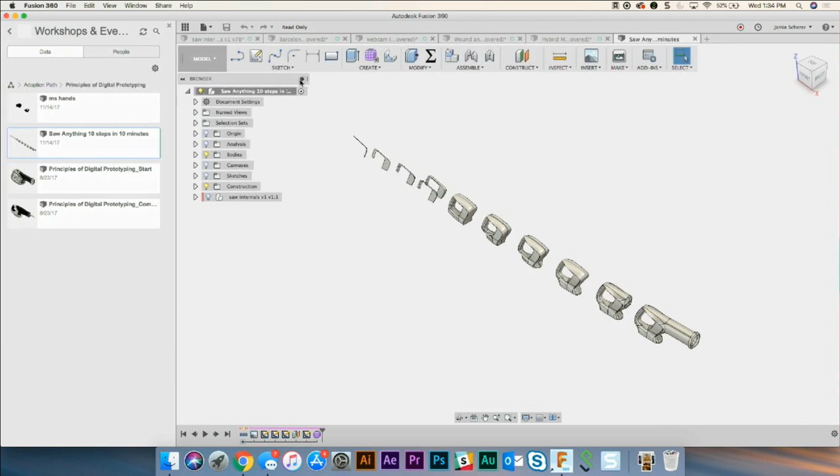This one I added literally 2 minutes before we started because I just learned it. So if this helps you, it helped me, thanks to these guys. They just showed me. So I am one person that is really bad. I have a lot of bad habits.

One of them is jumping in through the data panel, getting deep into several folders, and hitting the arrow in the top right corner, which takes you to the root of all of your projects, right? If you use Fusion, and you say you haven't done this once before on accident, you're lying. So if you hit that arrow, it takes you all the way back to the top, right? The root of your project, not the previous folder.

But when you do that, so I'll do it again. If you mistakenly, I want to go up a folder, right? The previous folder that I just clicked through, and I accidentally leave the data panel, go to the top of the data panel, you can hit this back button, which I refer to now as Back to the Future, and it'll take you back to the recent project that you're in and the folder that you were in.

Bryce and Patrick just saved my life a couple minutes beforehand, so I figured I would add it.

Couple more quick ones. So selecting through, and selecting parent, face, body, entities, etc. So we'll just do this one really quickly. So if you're in Fusion, I know this is something that new users struggle with all the time. So let's say I want to select, and this might be when I'm creating a joint, or it could be just for any reason. I want to make a selection of, let's say, the underside of this little component, right?

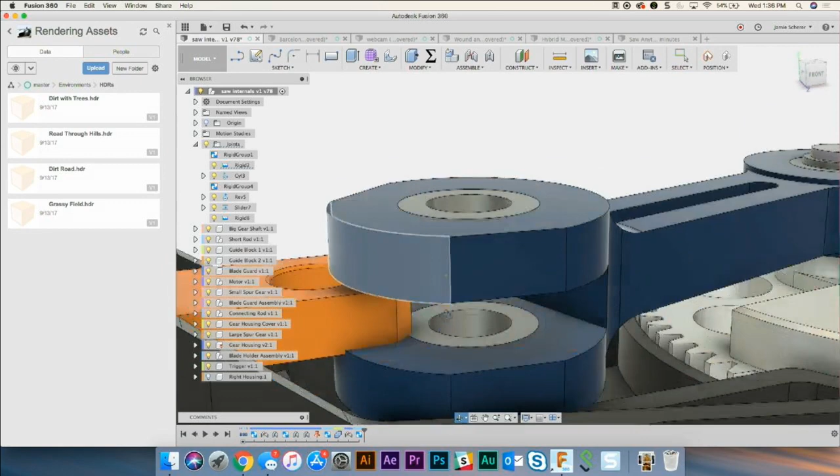And I can rotate around all day long and grab these, but really all you have to do is click and hold. So if you left mouse and hold, it gives you a selection or select through dialog. And then you can click through all of the faces that are within that scope that you clicked and grab the appropriate face that you were looking for.

The other thing that you can do is, same thing, left click and hold, you can go to the parents dialog, which will let you select, did you want to pick a face? Did you want to select the base feature that it was created from? Do you want to grab the whole body, the component, or the entire design that's within, right? So just an easy way to jump between different selection filters inside of Fusion.

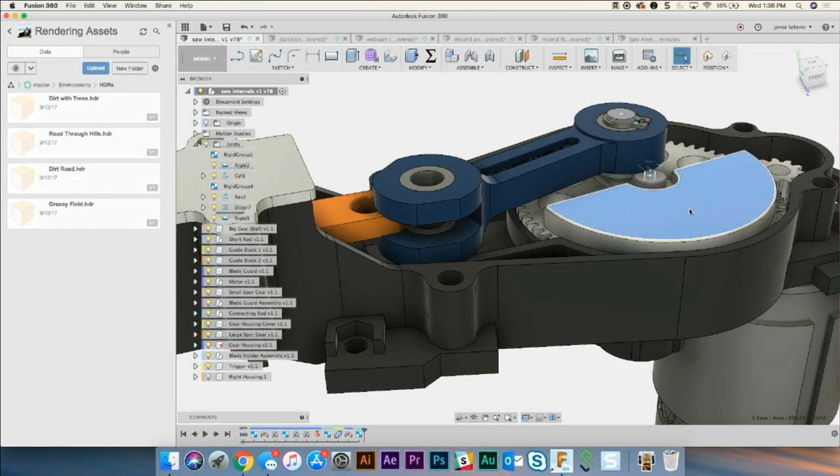And one more to build on that. This is a really quick one. We'll jump right back into the same model. So if I want to decide between selecting the body or a component, if you single click on an entity in Fusion 360, you'll see, if you look in the tree, we'll make some space here, it is body number 1, right, which is the body that I clicked on.

But if you double click, it actually grabs the component, right? So we'll do that again so I don't mix words. So single click grabs the body, double click grabs the component, right? So you'll see it grabbed the large spur gear as opposed to body 1, which is that component, right? So just a simple single click, double click, it'll hopefully save you some time from digging through your browser, finding the bodies or components that you're looking for.

And of course, the easy way to do that is when you're clicking on it, I might hide it. Oops, let me go back to that. Now, one thing that I know new users, myself as well, struggle with is you'll notice with this large spur gear that I had open, it's visible, the component, but the body is turned off, right? This can get confusing, right?

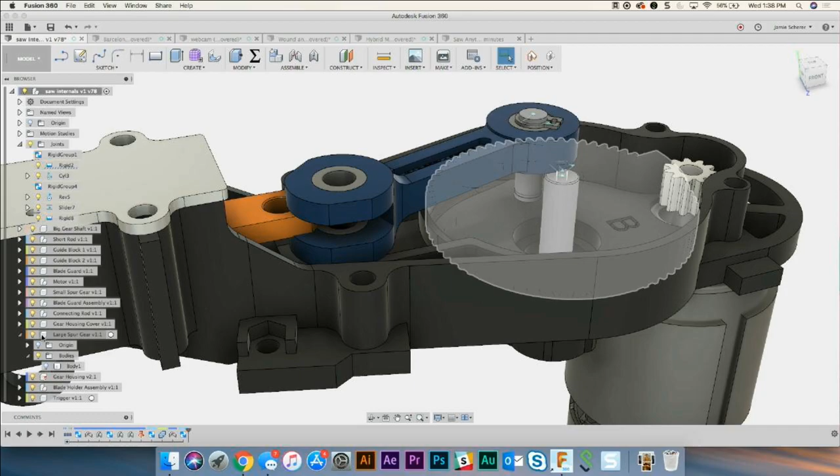You can start to lose track of even doing something like show all components. It won't turn that body back on, right? Because it's a body inside of a component. The component is turned on. So when that happens, we have a solution for you. There's an app for that.

There's an app for that. Patrick finds all the things that he doesn't like and fixes them in Fusion in a couple of minutes with API. So Patrick, more than a couple minutes, but that's okay.

All right, so I'm going to show the first. All of my stuff I'm going to show today are all just various little utilities that I've written over the last couple of years, and they're all on my GitHub site, and we'll have the link up in a second.

This one, I call it Show Hidden and Display Utilities, I think is the name of it, and it's just a bunch of quick little things here that go into the drop-down. So you can say, for example, show all bodies. And it will just show every body, no matter if it's nested deep down into the component structure, so you don't have to find it.

And then the one that I particularly like, I call show hidden bodies. So what this is: you have some model open, it has hidden bodies that could be deep within the structure, and then you say show hidden bodies, and it inverts the display. So now you're just seeing the bodies that were hidden,

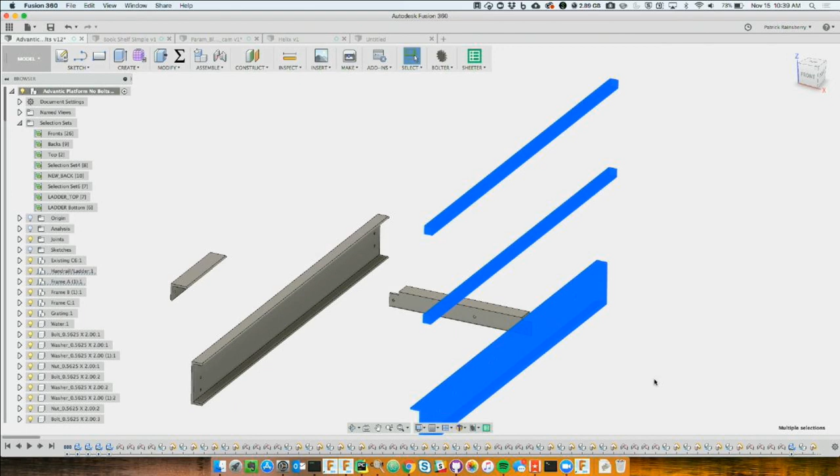and so now you can grab these, hide them, and then say show hidden bodies again, and now you're back in the state where the things you wanted are shown. It also has the same capability for components and construction planes, where it's sometimes very difficult to figure out where that one construction plane you wanted was deep in a structure. And also to just hide them all, which is nice too.

Hoot and holler if you like it.

Silent. Please. Yeah. When you're doing the API stuff, could you write keyboard shortcuts? It's not exposed. No, I know. Repeat the question. Oh, sorry. The question was, could I have written it such that it was hooked up to keyboard shortcuts? And the answer is no. Why not? It's just not exposed. There's no event listener for keys. We'll talk about it later. But jump on the idea station and request exposing key events in the API.

If you don't have those three little icons in the lower right, is there... Oh, this. This is all API. So this is an add-in, it's a plugin. Sorry, I should have been more clear about that. We'll give you the links to download these little utilities. These are little utility plugins that you install through the add-ins thing, and then you'll see it here in this list. It's called display utilities or something.

Holy moly, you have a lot. Yeah, some of them are half-baked. You can get a preview of next year's tips and tricks session by looking at that list. I've never seen that many.

All right, so let's switch it up. Those were some general tips. Now we're going to get into the building blocks. Every sketch, unless you're just T-splining or using primitives everywhere, which is too hard. So let me jump into Fusion. I'm going to start slow and work my way through it. I'm just going to start with a line tool, and the first one's pretty straightforward. I'm going to continue, and you'll see that it's going to keep adding these lines.

It kind of gets hectic sometimes, and if you click and hold while coming out of this, you get a tangent arc. So with the click and hold, you don't have to go back and activate the tangent arc command. And then if you come out with a line again, you'll see this tiny little blue symbol, a circle with a line in it, I believe. That's going to create another tangent constraint if you're trying to chain all these together.

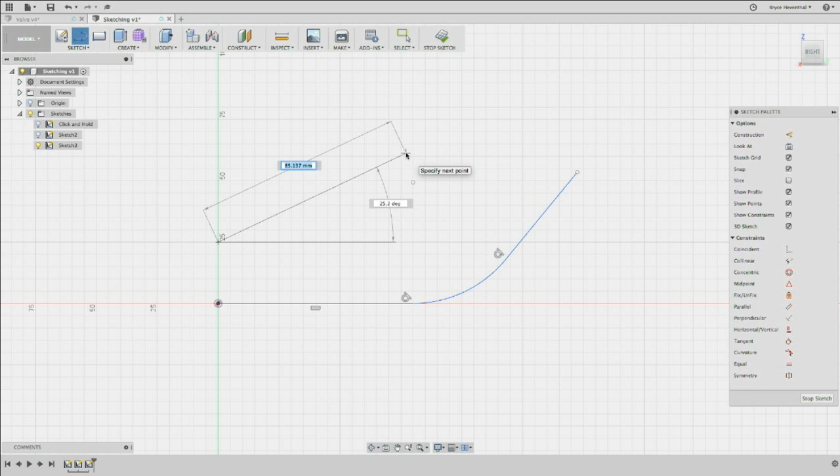And then this little bane of my existence, this green checkbox. I always click it accidentally. It actually ends the line. I use a couple different tricks, though. What I want to do in this case is draw a line and end it, but I don't want to continue, and I still want to stay in the line command. So I'm going to double click, and you'll see I'm still in the line command, but I'm not chaining them one after another.

Usually you're doing the game where you click, hit escape, go back to the line command. You always could right click and drag up, but I love that double click. We call it create and continue. So double click, and you can keep going. So there's a big one there. Let me stop this sketch and hide it, and we'll turn on another sketch.

This one, I always forget that it's a part of the sketch tools, but let's jump in here. I'm going to activate the line command again. Again, I use my S key, probably 100% of the time, as Jamie was saying. If I touch these top bars, it's because I'm still searching for everything too, so I don't ever come up here. First, I want to make a line perpendicular to this box. Usually you'd draw a line and get perpendicular. If it's off the XY, or in this case a ZY, it wouldn't get perpendicular.

But if you click and hold, you'll see it actually is going to be perpendicular to that line. And it works in a couple different cases. So if I click and hold here, you'll see that same behavior. And this is where it gets a little bit tricky.

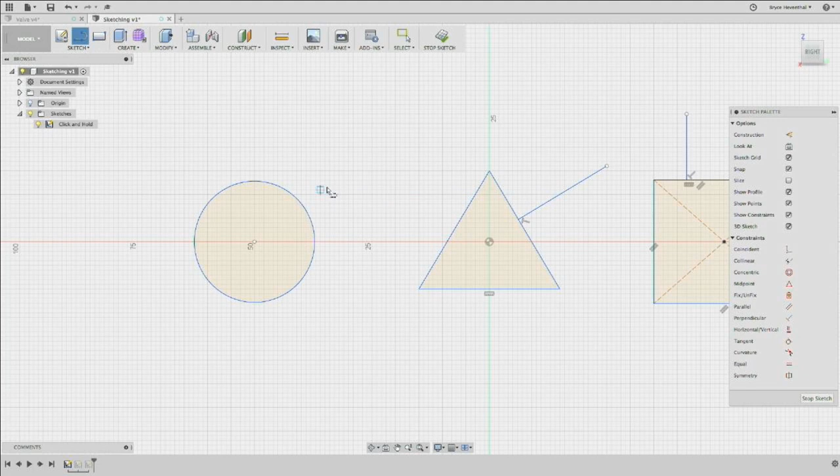So if you click and hold in a circle, what do you think is going to happen? Anybody got a guess? Sort of right. It's tangent when you're not at the 0, 90, 180. But if you go to the 0, 90, 180 or 270, it comes out perpendicular to that circle. So the two behaviors are kind of hard to notice. If I start at one of the quadrants, it'll come out perpendicular. Anywhere else, it comes out tangent.

Just quick ways to keep doing lines and save you from having to do extra relationships. Stop that sketch and jump to another one. That's the double middle mouse click that Jamie showed earlier.

Ooh, scared the crap out of me. You were supposed to be talking to this. I am. Oh, sorry.

Continue. So the next one, what I want to do is make constraints here. They have this huge list of constraints over here. I have a tough time reading them, and especially if you notice, they actually filter slightly gray. I can't see it very well when you select things.

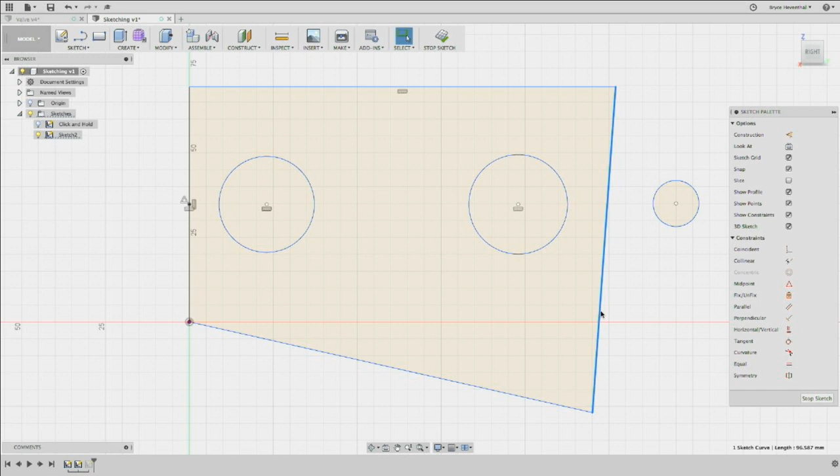My favorite thing when I'm making constraints, I basically always do this: I select my entities, right-click, and you get a filtered list right in the right-click menu. I do that all the time. Uh-oh, that is not the constraint I wanted. But we have an undo, if you guys haven't found that yet, and I'm going to talk about that a little bit later. Then we'll just make that one vertical.

Boom. So this next one kind of drove me nuts for years. What I really want to do is draw this circle over this line. I want it to line up right in the middle. We would call this a midpoint constraint, but there's no point here, so I'd have to create an extra line or do some point.

Not quite. What's going to happen is you have to start by turning on the constraint. Fusion's one of the only tools I know that, once you activate the constraint, it's kind of locked on. So you can quickly make all these horizontal because it's stuck. I click one, click the next, click one, click the next, and make a bunch of horizontal constraints. It's great for horizontal, equal. If you want to make a bunch of things parallel or concentric, it's a great method for that.

But now I want this circle right here to line up right in the middle. So you have to activate the constraint first again, click your point, and hover around for a while trying to find that midpoint. It's not happening. Magic hotkey: hold shift, and you'll get that little triangle come up, and that's the midpoint. Now this is locked in there, so if I make this any bigger, you'll see it always follows. Shift is that magic key.

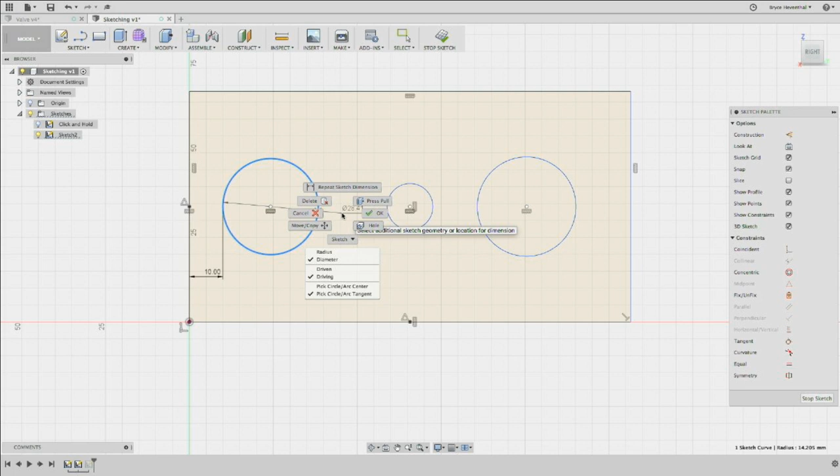Just remember, you have to right-click first, click it, then right-click again. Oh, it locks on, sorry. Whoa, turned on something. So right-click first, click that guy, then come over here and select this guy, and now we have tangent from circle to circle. You could go from max condition, min condition, min to max, whatever, you could get fancy with it.

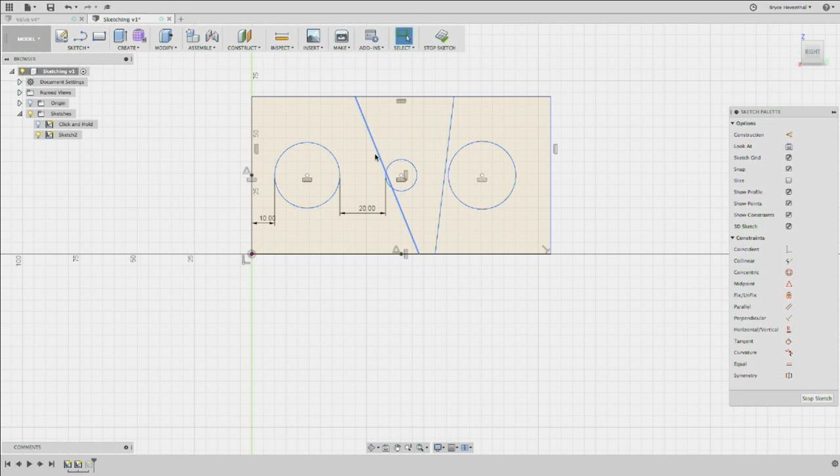All right, this next one is one of my favorites actually. So I like to create a lot of construction geometry. It drives me a little bit nuts when I get too many regions, because when you start extruding and stuff, you get all these different profiles that you want to do. I use construction geometries for symmetry, weird things, just to reference.

So usually I would create the square and then go back, and if you didn't know, the hotkey's X to make a construction, so I'd go back and hit X, or turn it on and off over here. But what I really want to do is create that square first with construction. So you would turn on the construction tool, and then use whatever sketch tool you want. We call it forward create construction.

Now I could use the line tool if I wanted to. I'm still in this construction mode. Remember you have to turn it off. So you could see that now I could make a bunch of construction lines. Just remember to use that to turn it on and off.

The construction line is, in the sketch palette, there's a construction box. Once you turn it on, all the sketch tools you use will now be construction geometry. You could do it before or do it after. We give you the flexibility to go either way.

All right, so this one's just a quick one that actually works throughout most workspaces, and I use it for simulation - some of my favorite selection tools. If you didn't know, right here we have a big select button with a whole slew of selection tools. Take a look at them. My favorites are invert selection and select by size.

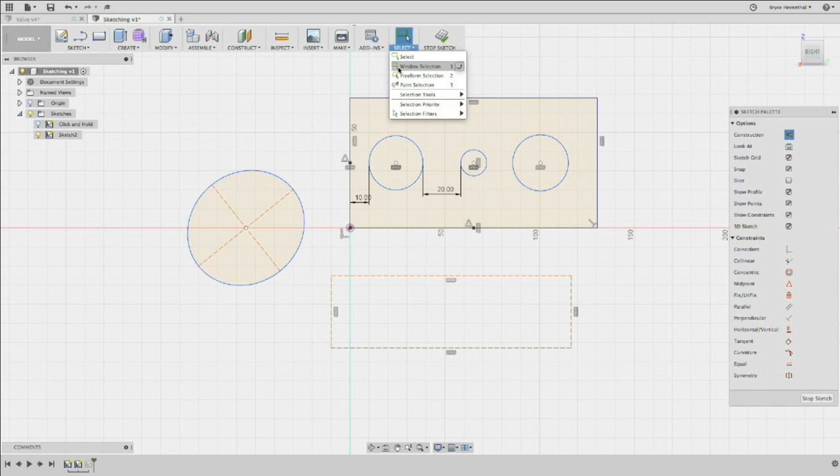But just to select sketches, by default you're on this window select, where left to right it selects inside that box, and right to left it's whatever's touching that box. So left to right, that entity has to be entirely in that box, and right to left it just has to be touching the box. Same thing goes for a couple other ones we're going to see here in a second.

So if you go down to select, it's also the 2 key, the freeform, and you can make whatever shape you want. I like to use this for redline markup in Sketch if someone's watching. But same exact type of thing - if you go left to right, it has to be inside that box, or right to left. I always get this one backwards.

Counterclockwise? No, that's weird, can't even get it to work. There it is - so it is right to left. And then it just needs to be touching that box. You see it got both of them.

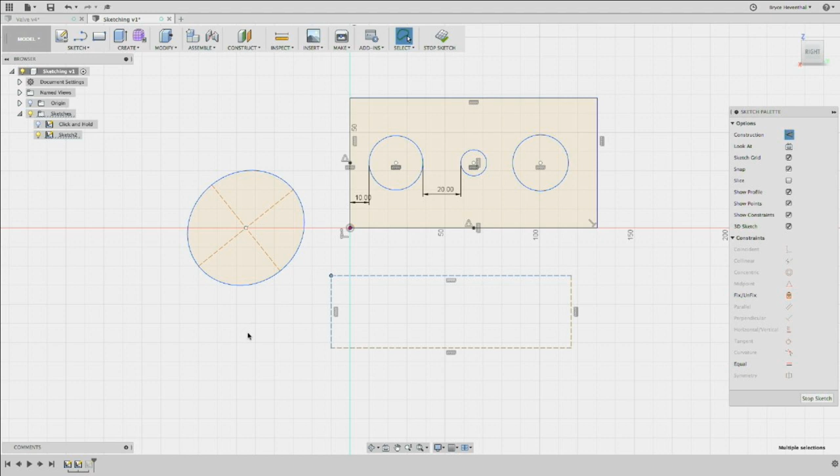All right, let's switch real quick - last couple ones for Sketch. This one is one of my favorite ones. Let's jump in here. I want to create a sketch for some holes here. So what happens is I want to bring my circle in.

Especially for new users, you get all these blue lines - you see these blue lines I'm picking up in the background - those are just things way out in, I don't even know, no man's land. So if you actually just start clicking, you'll see that I just made two coincident, fully defined that accidentally to something random. So the magic hotkey - if you hold Command on Mac or Control in Windows, we need a simpler way to say that eventually - it turns off those auto projections. So you can just click and not worry about picking them up or having to go back and delete them later.

Let me just create a circular pattern real quick. Object, let's get the point. Say I want 4 of these guys - just circular pattern of circles. One thing - design change came, now they want 6 holes. Usually I would probably go back and delete those.

For sketching, if you do any patterning, there's actually a feature here, or a constraint here essentially, that you can edit, and you could jump right back in and change that to 6 if you needed to. So there's that little constraint right there. It gets a little bit hectic, especially when you have a ton of patterns to find which one's which, but you could edit those patterns.

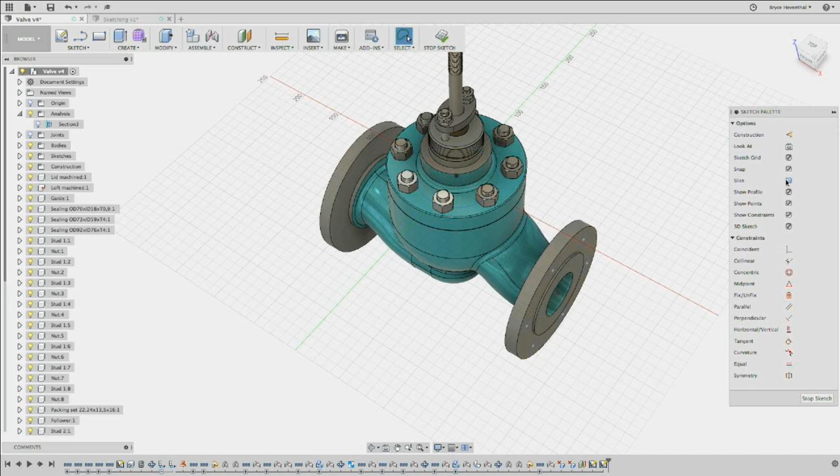Now I'm designing inside this part, and I always have issues clicking on things, especially when you go to extrude something - you select this top face, and I really want that profile there. There's actually a button called Slice, and what it does is like a section view at that time, and it brings you down here so I could keep on sketching.

Maybe I wanted to add some circles around that one, and now I could use that. Slice you can turn on and off globally from here, as well as select the sketch and use the same slice sketch. So if you have tons of sketches in the middle somewhere, you could select different sketches, slice them, and kind of interrogate the model that way. But I'm a big fan of using slice out of the sketch palette.

With that, we're going to switch it over to some modeling.

All right. Sorry, if you guys have questions, shout them out. If it's a really long one, we'll be around all week. And when you see something awesome, clap - high five each other, come up here and high five me, Jamie, if you really want. It really makes this better for me, not for your ego, but for me - it's really better for us if you clap a lot. Yeah, exactly.

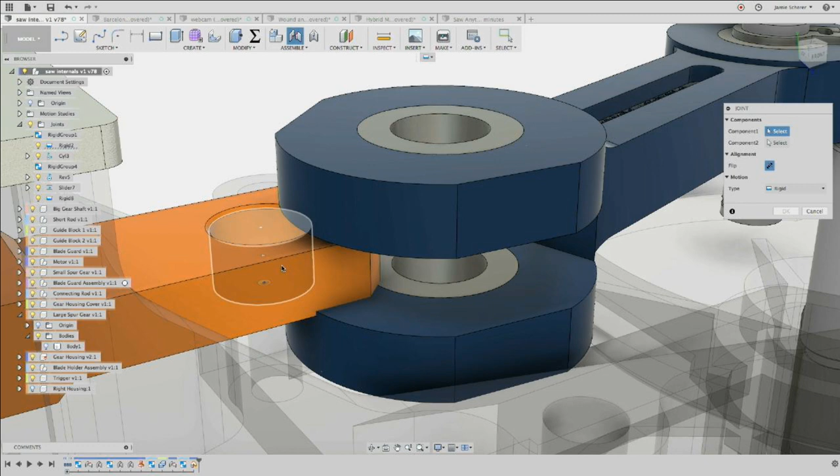In this case, I'll create one between this selection, and now I want to grab, again, empty space - I want to join the center of the blade rod connector to the center of this crank arm, and I don't really have a good way to grab that. So the way you do it in Fusion: simple right click, say between two faces. This will give you the ability to say the first face is the bottom, second face is the top, and then you just have to locate the joint origin. So you'll see when I select maybe the center of those bushings, it'll grab that empty space or that middle and then bring them together for me.

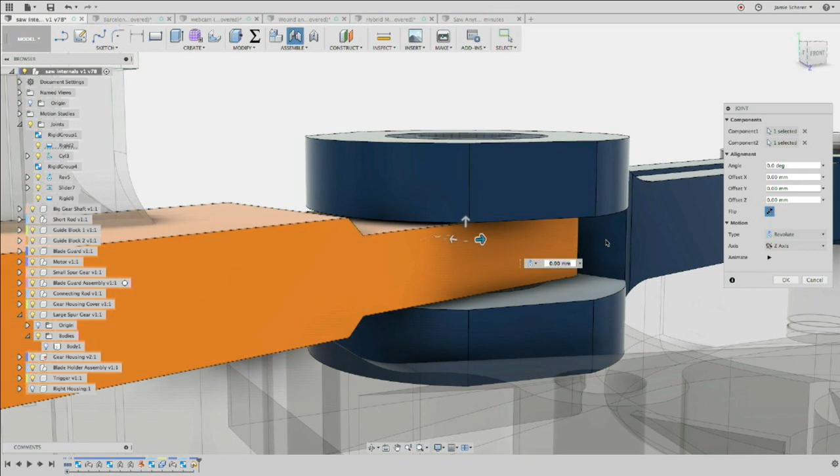Okay, thank you, John. That's it - it's a good one, a really helpful one, and ultimately helps you build better assemblies really quickly by using that between-two-faces option, actually creating a joint origin between two faces where you can manipulate the joint itself.

Is it the same functionality, just faster? It is. The difference - what John is referring to is you can create a joint origin. Joint origin is a good instance if you wanted to create a joint between two components. Between-two-faces only works within the same component. If you wanted to grab space between two separate components, a joint origin would be a good way to do that. But in that case, if they're not the same component, then you would want to create a joint origin.

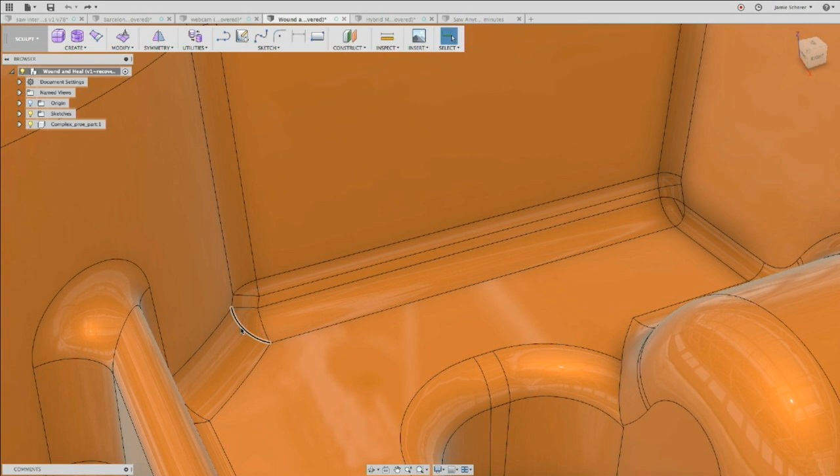All right, next. So the other one that I want to show really quickly, and hopefully this will be helpful for some of you. If you're frequently importing geometry, it might be geometry from any CAD system out there. If you're machining parts or bringing in someone else's geometry, you might need to make changes, right? And hopefully everyone's aware by now, Fusion is incredibly powerful at direct modeling, but sometimes it just can't solve the geometry, right? So you'll see, like in this instance over here, I've got some weird fillets.

Maybe I don't want them. I want to change the fillet. I want it to be one continuous fillet as opposed to these kind of two. And I have some bad faces here. So the simple thing to do in Fusion would be to delete them, right? Grab these faces, hit delete. Most of the time, Fusion will say, no problem, I'll remove it.

But in this case, it gave me a warning, right? It said that it couldn't solve that geometry. And it might be for any number of reasons. It could be the geometry. Probably in this case, it can't quite solve what's going on in the corner with these fillets. Awesome method that Brad Tallis on our team has been showing everyone. He calls it the wound and heal method, right?

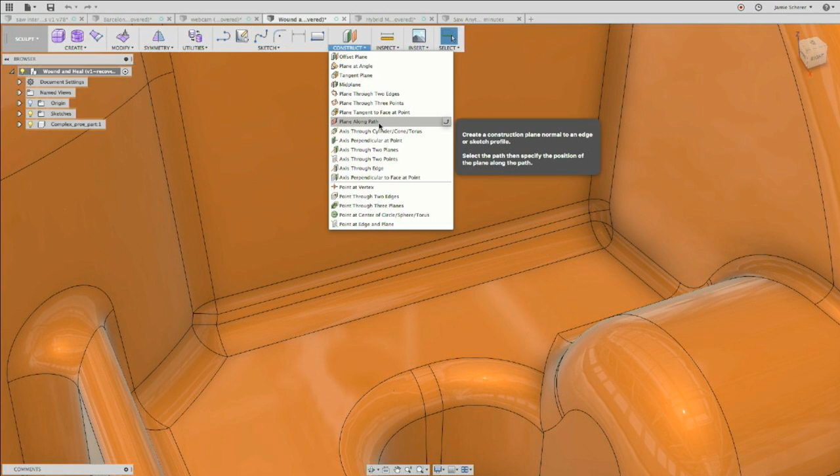So what I'm going to do is wound the geometry, right? I'm going to create a plane along a path, put it all the way at the end. And then I'm just going to use something simple like a primitive. So we'll just use a sphere on that plane, located anywhere. Basically, I'm just kind of taking an ice cream scooper and removing out that geometry, right? It's bad geometry. I don't want it. We're going to cut that out. I'll do the same thing on the other side. So we'll say plane along path, right? I'm just kind of locating this really quickly.

The ice cream scooper? Is that not a thing? People don't use ice cream scoopers?

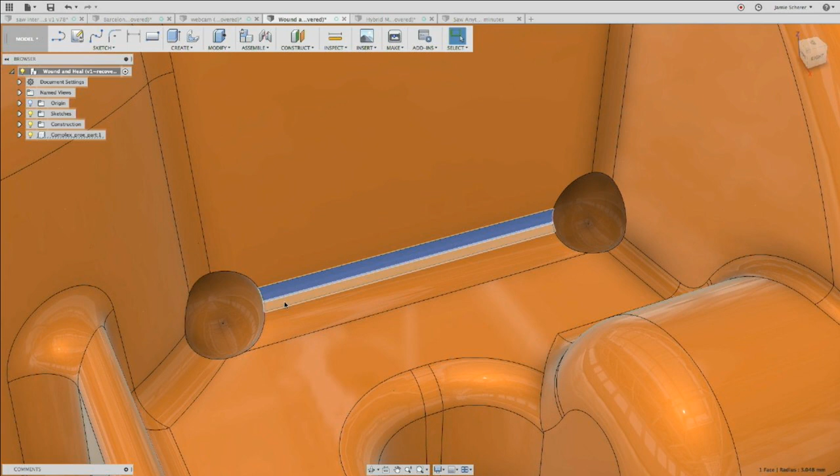So here we go. I'm going to do the same thing on the other side. In this case, I'm just trying to remove that geometry. I don't want to go too far because now I'm actually cutting through the back of the part, so just be careful. But in this case, as long as I kind of fully encompass the geometry that I don't want there, now if I grab these faces and hit delete, Fusion solves it right away, right? So it's able to figure that out.

Now all I have to do is delete the ice cream scoops that I don't want. Fusion will solve that, right? So now it's able to kind of compute the geometry because I removed it from the selection.

Woo! Thank you for that.

Yeah! And then put in a continuous fillet or whatever I wanted to do, right? So a great way to defeature and work with parts. So review: lock on joint locations with control or command between two faces, and we talked about wound and heal.

And Patrick, I think it's on you. Oh man, it's already on me? Some parameters. All right. So this one is just a tip. So am I up? Yeah.

Okay. So I was just going to talk about a couple things in parameters real quick, which will lead into the next little section. One of the things that I think is really powerful in Fusion, really useful, is using these user parameters and dimensions in your models. So when you're in a model, I've got this really simple model we use as an example, and Modify, Change Parameters. This lets you access a couple of things.

One is it'll show you every single dimension of every single feature in this list. You can see that in the first sketch I've got 2 dimensions. In the extrude I've got the depth, and then for the thickness I've got this thickness. And the other thing you can do here that's pretty useful sometimes is you can actually rename these.

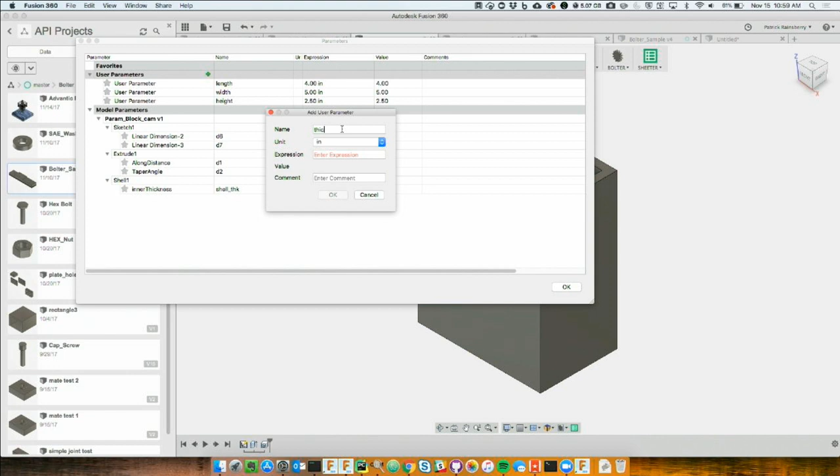Although in a lot of cases what I prefer is you can actually create user parameters. So you can just say I want to create a parameter called thickness and make it equal to 0.25 or something. And then you can reference that in here. So in the value, I could either edit this and say I want to change the shell thickness to be 0.5 or something.

One of the things that I think trips people up a lot that I wanted to hit in here for the tip was everything in Fusion is always resolving to a unit. When I create a parameter, I could create a parameter called, say, height_CM, and I could change it to be centimeters. And you can only do this when you're creating it. It's the only time you can change the unit. The units are set forever.

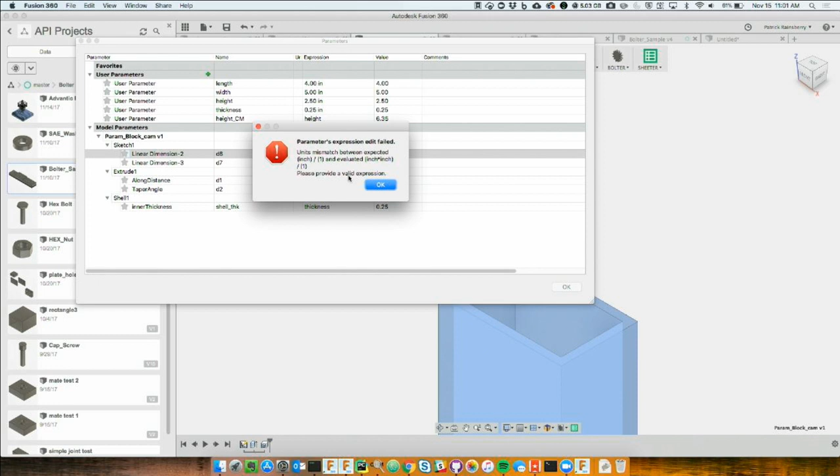And I could even say I want it to equal the height, for example. And then it'll evaluate now in inches. So units always have to be resolved. And the point of that is, if for whatever reason I wanted this to not be length, I wanted it to be like length times width. This one I see in the forums a lot. Somebody will be trying to do something like this, and they can't figure out why it's not solving, and it's because it's resolving to inches squared.

And so the solution to that, which you'll find very useful in a lot of cases if you try to do these more complex expressions, is to just say divided by 1 inch, and then it'll resolve, because now the solution is in inches. There's also some other things you can do in here that are kind of fun, which is kind of hidden, you have to sort of know it: there's a bunch of math expressions in here, like floor, round, sine, things like that. So I could do the floor of height, and it would just round it down to the next integer.

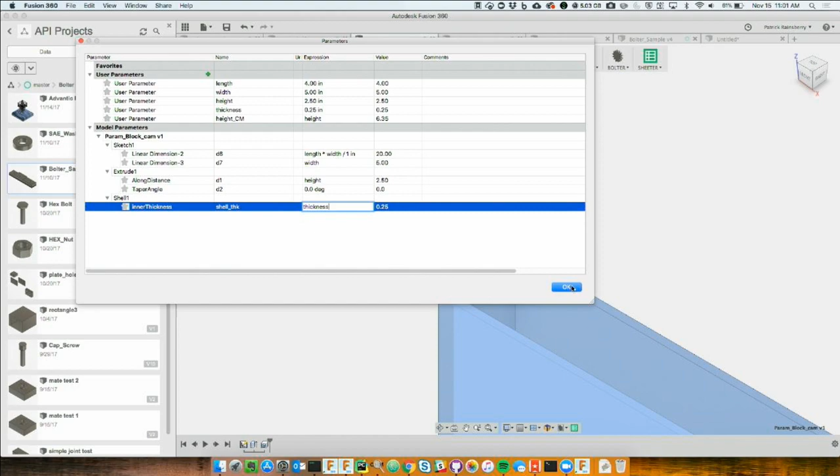Who would have thought you would have got a math class today, guys? Oh, this is just the tee up for the big math coming next. Anyway, so that's, yeah.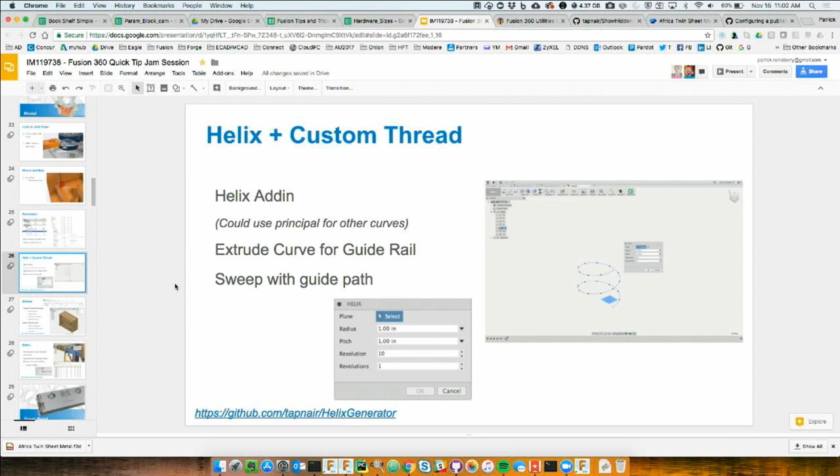Next one is Helix. So custom threads and helical curves. I'm now going to be deviating from functions that are in Fusion. It's a common request, and I've got a couple of fun little tips on this one too. So let me go create a new part. And again, another add-in you can download from my thing.

So once you've installed this Helix plugin, now I have a little dialog box here called Helix, and then you can just pick a plane to start it on, and it's going to go off the origin, and then it's just some basic parameters in here, like the number of revolutions and the pitch, and you could also set, because it's just interpolating, some resolution, basically how many points, and now I've got a Helix.

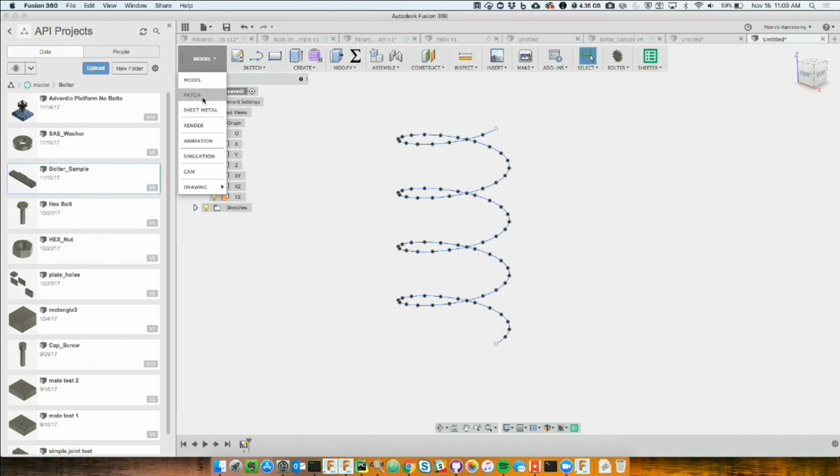And then I wanted to show this really cool tip that a customer showed me fairly recently that I thought was an amazing way to do this. Because if you're going to do a custom thread pitch, a lot of times you want to actually have a curve to sweep on and a guide curve. So to create the guide curve, this is a nice little tip: you can take any curve in Fusion, even if it's a complete 3D curve like this. This is obviously a helical curve.

You can go to surface, the patch workspace, and do an extrude, and you can actually just extrude the 3D curve up. Isn't that magic? That is magic. That blew my mind. It works. He's like, oh yeah, that's how I do that. What? That's amazing.

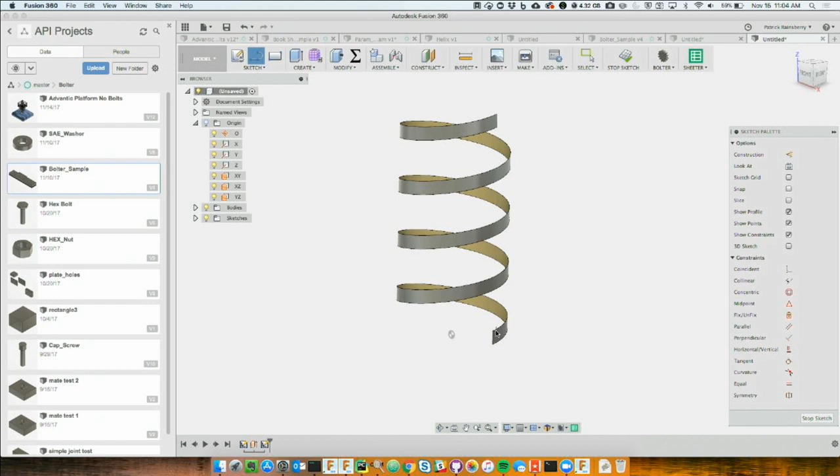And then of course you could just go back in here, create a sketch and do something real simple like some little profile, and then we could sweep it. I'm going to say I want to do path and guide rail, so the profile will be this, and then the path and guide rail. Obviously I could have made this a much more complex section, but then you get the custom springs, threads, whatever it is that you want to do. That's a fun one.

All right, now this one's real fun. So for those of you who like to mess around with parameters and sizes, and if you've ever used any other software with things like configurations in it, this is debuting hot off the presses today, making its formal release in the Fusion Tips and Tricks session right now: a little project I've been working on that I call Sheeter, and it's my trademark. It's gonna get ripped off one day.

And what this lets you do is, so I've got a model, and in this case this model is all hooked up to a whole bunch of user parameters. And what this plugin will do is let you hook the design up to Google Sheets. So I'm going to say I want to link this design to a Google Sheet. I've already got one created for this, but you would say, I want to create a new sheet, and do you want to put all of the parameters?

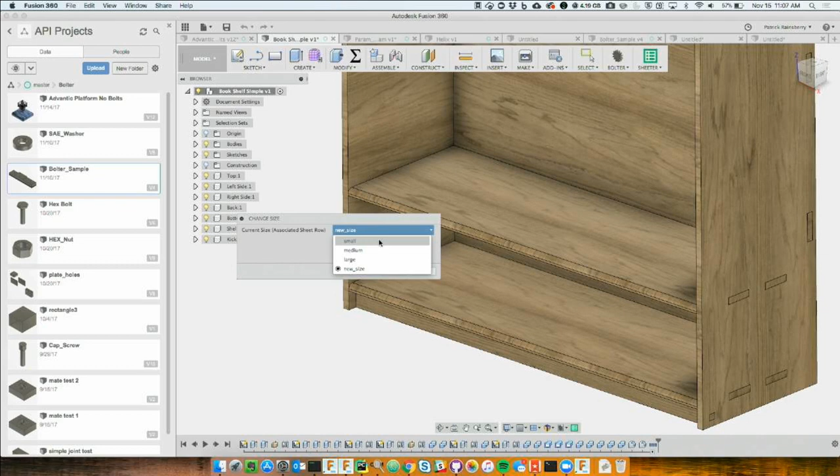And I think I still had some debug stuff in there. Now it's showing me the different sizes from the Google Sheet, and I can switch between them. I forgot to turn off my little debug messages to myself. I've got to remember to do that. But anyway, so there's that.

And I won't go through all the rest of it; I've made a more extensive video on this one. But it'll also let you, if you've got a bunch of sizes for a part and you've already created toolpaths for it, so I've got a bunch of setups and toolpaths already created for this one, and then in Sheeter, you can do 3 things. You can have it generate G-code for all the sizes, and you pick whether you want to do setups or folders, and which ones you want to do.

So say I want to do these 2 setups, which post do you want to use, and where do you want to output it, and then it'll compute each size, regenerate the toolpaths, and export the NC files. And the other 2 things it'll do is either generate a Fusion design for each size, so you could have a new Fusion design in the project, or export a STEP file or an IGES file or STL file for every size.

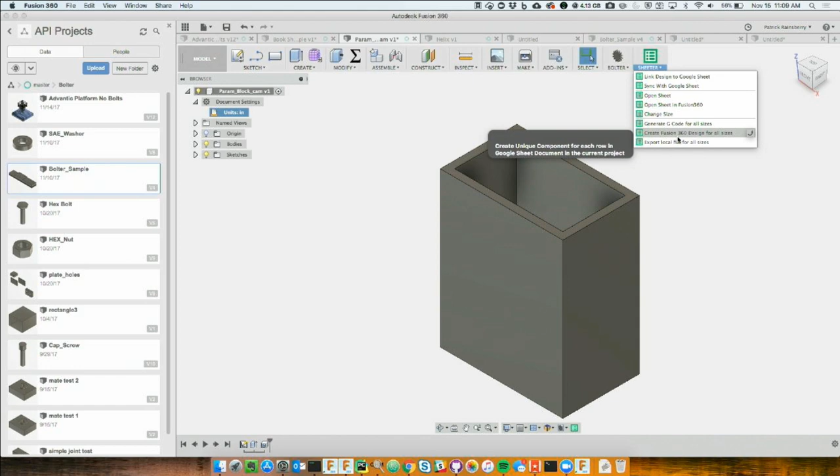So that's fun. I feel like that one's going to get some traction, downloads. Yeah, definitely go try that. That's basically configurations. No, it's not. Sheeter. It's so much better.

And then I have one more, right? So I made that one, we're like, oh my God, it's already 11:09. All right, I'm not even going to demo this one. This one I call Bolter. Yeah. And you can download it, but it's running right here in a little GIF.

And basically what this one lets you do is pick a bunch of faces. So you can pick all the tops. You pick the tops that you want to search and the bottoms that you want to search to find matches. And then it'll iterate through all the faces, and it'll find all of the hole stacks and then populate them with a bolt, washer, nut, sized appropriately. And then you manage all the sizes from a Google Sheet. And so it's like a little Google Sheet database thingy.

The setup is non-trivial. Yeah, I give you a couple samples right now. I need to work a little bit on the setup, but it's pretty doable to set it up. And you just build out your own models. I'll give you a cap screw and a hex bolt to start with. Are they even fastener part numbers? These are just, I don't know, I just auto-filled the column. I actually was thinking I'm gonna explicitly not do it with the McMaster stuff so they don't get mad at me or something, I don't know.

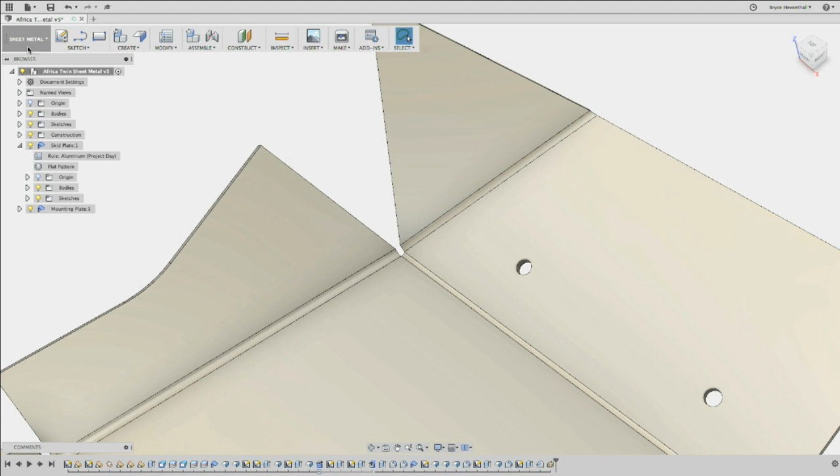Magic. All right, so now we're going to switch over to some of the new stuff that was added over the summer. Some sheet metal. Has anybody got to try some sheet metal? There's several classes. We're going to do some more of the stuff, not the basics you would need to go, but I would definitely recommend seeing some of the classes while you're here. So we have a part here that we're going to be designing, and the first thing is you just hop in the sheet metal workspace. There is some switching back and forth between sheet metal and model in this little quick tip session I'm going to be showing.

So first, what I want to do is bring this flange. I'm going to create a flange, and I want it to match this profile here. So let's just use the flange tool. We only have one flange tool, so it's not too hard to figure out what's going on. Sorry about that. So in this case, I want it to go up, and I'm just going to kind of eyeball it. They're actually just going to weld this, so we just need to get it close so we get a good flat pattern for this.

And if you actually look, what's going to happen, though, Fusion automatically is going to combine these two flanges. Yeah, that's great. Once you hit OK and you try to flatten this, it's just going to error out and be like, no, you're not doing that. You get a little error. So this is usually bad when you go to flat. So I have a couple tricks.

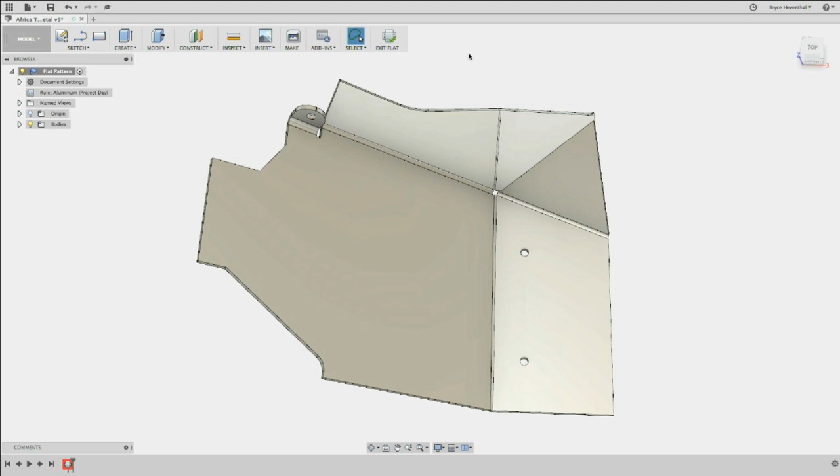In the short term. We have a couple ideas to solve this in the long term, but today what I would do is kind of do that same method, do the flange, drag that around, kind of eyeball it up to something, and then I type in 0.1 just to make a tiny little flange. That's perfect here. And I have a couple different things. So Fusion has different types of solvers, parametric, direct, surface, a ton of different ones. So I'll show you two different ways we could do this, and I'll show you bads and goods about both.

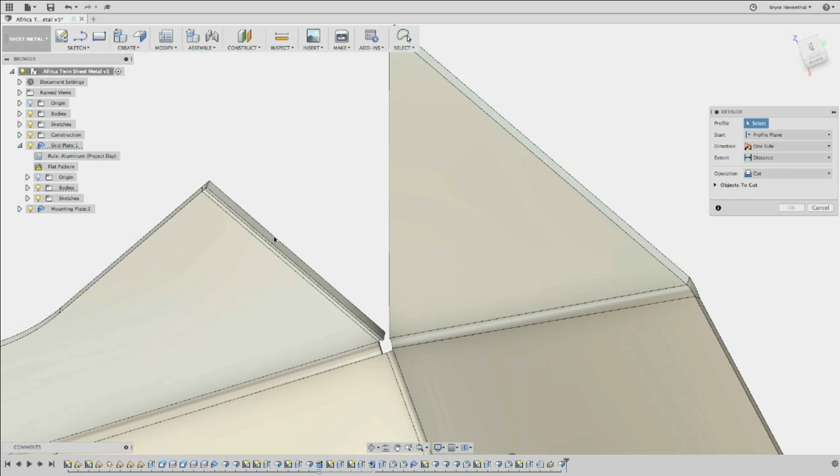So this first one, I want to drive it parametrically. So if this flange ever updated, this flange would always go up and butt against it. So let's just use my extrude tool. I'm just going to hit E on the keyboard, bring it up, and now we get options for to object, distance. These we don't have in flange yet. They will be coming shortly, but I could say I want to go up to object, select that face. It always errors out, don't worry. Just select that. And then you could even apply an offset. Let's say I want to go 0.1 inch. And there we go. It goes right up to that, just as I expected.

The bad news about this one is, if you saw that flange that I selected, let's unfold this real quick. It's going to follow that face that I selected. So unfold, select this guy, hit OK. Oh, collect all bends, hit OK. And if we look at this from a top view, it actually is at this weird angle.

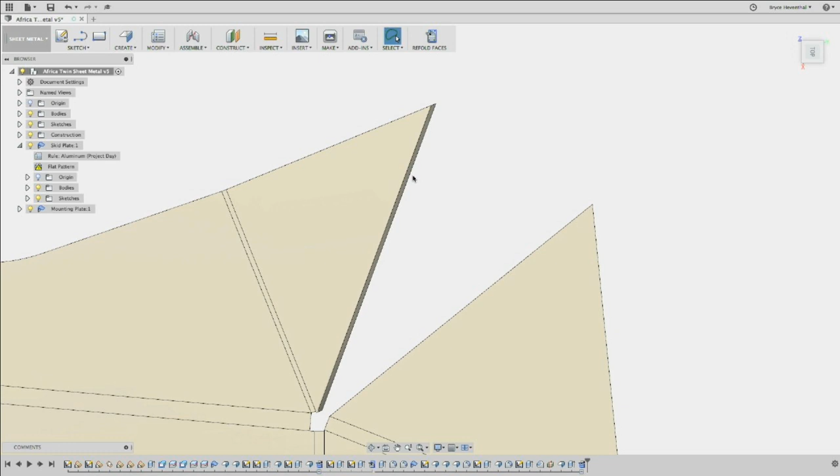So if you're going to water jet this, unless you're willing to program a 5-axis water jet for this very simple part, you get this slight angled face. Don't worry, we have a quick way to fix it. I just create a sketch while I'm in this unfolded environment, project in this face. So just hit my P key on the keyboard, and it's just going to automatically project that in.

And then we can just extrude a cut, grab that guy, and it's solved. Now we're back to just a simple 2.5 water jet part. So that's my first method. It's a couple extra steps because you got to unfold, then refold, then you get back in there. My next method is slightly magical, not as parametric though.

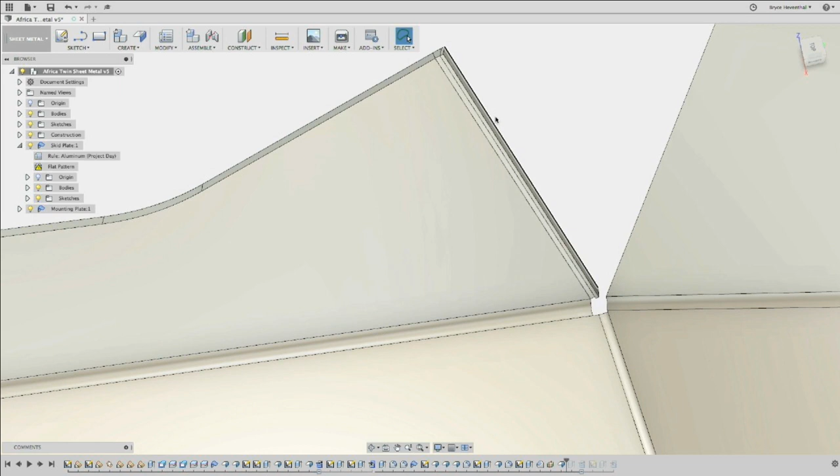So let's do, where am I? Sorry, wrong place in the timeline. So still same, you create that little flange, just put 0.1 or something super small. This time, I'm going to use the Move tool. So right-click, go to the Move and Copy. This has a ton of different options and so many use cases, the Move tool. But in this case, I'm a big fan of using faces.

So select Faces. I'm going to pick this face. Watch out when you pick it. You see where it locks onto these points? Don't worry, I could always reset it later. So I'll do this on purpose and place it there. But you'll see once I start rotating, it's rotating about some arbitrary point where I clicked. So let's not do that.

And what we could do is set the pivot. So I want to set the pivot at the bottom here. Hit the green check mark. Always remember that after you set your pivot. And then I could just click, drag, and pick how far I want this to go. Just type in an angle if I wanted to calculate that. It will combine again if you run it into the other geometry, but it's just another way to combine it. So one solution was parametric, one was direct.

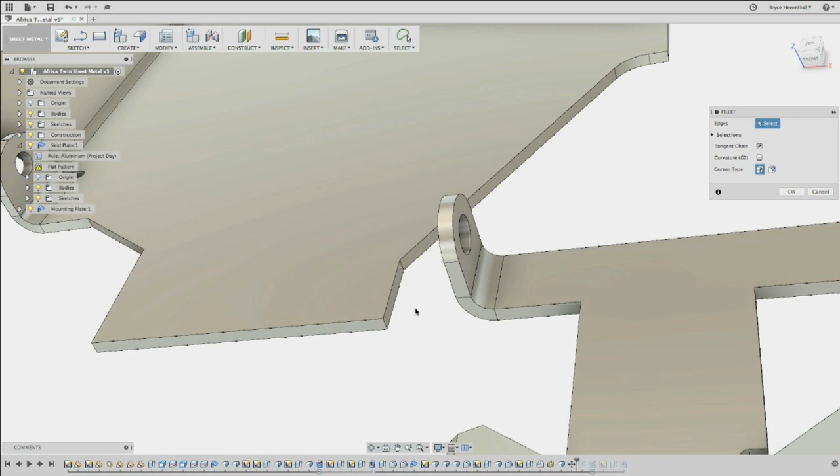And then finally, we'll do a quick one here, same kind of technique. Hit the extrude button, or the flange button. Oh, before I do that, most important part, will this thing flatten? Just always select this, hit flat pattern. Of course it will, you get the flat pattern correctly, perfect. So now I want to create a flange that's going to butt up against this. And this one I'm going to do parametrically.

So again, I'll use my flange tool. Simple, there's basically just a flange demo, if you guys haven't seen the flange yet. And I'm going to do the same technique and bring it down here. We're going to say I want this to be 0 degrees and 0.1 is fine again. And you'll see it pushes that out there. And I want this to actually go up to this face. But currently today we don't have a to object option in the flange tool.

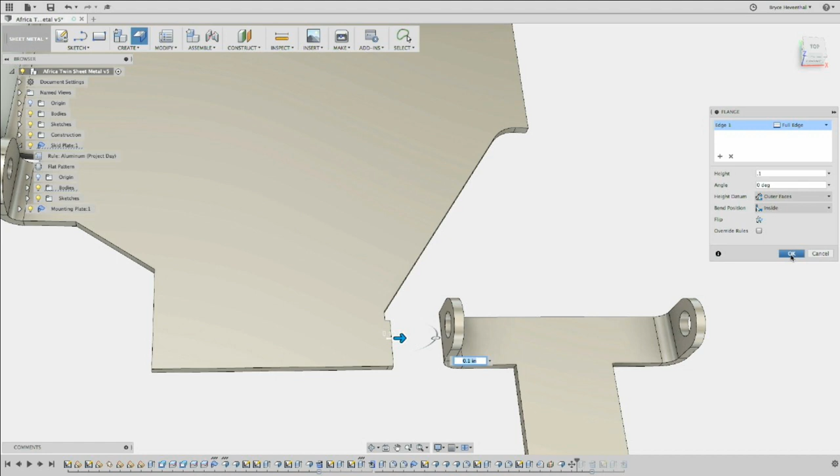So you could select this face actually, and it sometimes goes up to that face or point. I think I have to select something weird to make it work. But it won't be parametric. So what we can do is same exact idea, create that simple nub, use the extrude tool, and say I want this face to go up distance to object.

And by the way, it usually errors out when you do this to object automatically, because it's trying to find that face, but if you look, it extends past that face. So don't worry, try the second option as well to see if you get your result. In this case, it's trying to cut, it doesn't see geometry. And now this will be parametric to that flange.

So now we could say, I want to flange this guy up again. Oh, that's a fillet tool, sorry. Flange up. And we'll just say I want that to be 1.5. Quickly create a sketch, project these guys in. Hit OK. Extrude, cut this, this, and this.

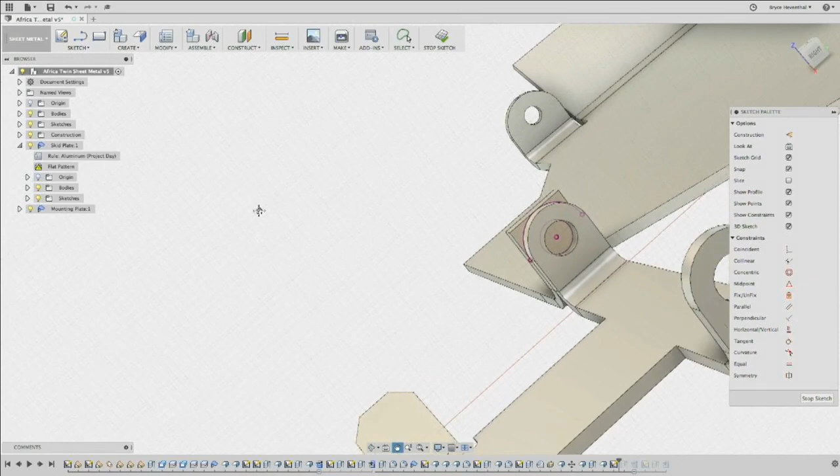And if we come in here and change the sketch, let's say we want this to be 3.5. Hit stop sketch. That flange will always be parametric to that other flange. So just remember to use different combinations. It gets better.

So right now I've been in the sheet metal workspace, but watch out, because some of these commands use a couple hotkeys, and it reaches into other workspaces. So you have to jump back and forth, and some of them aren't actually exposed through the sheet metal tool or the sheet metal toolbar.

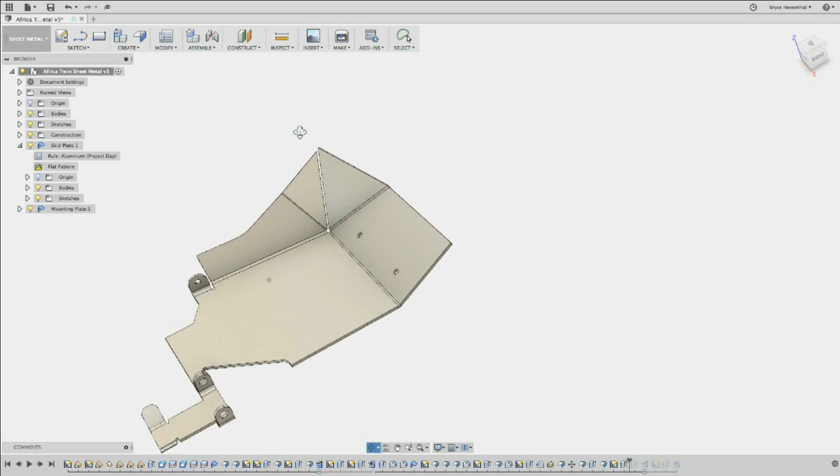So actually what I want to do next, this is half of the side of this sheet metal part. We want to mirror it to the other side. Just remember that we still have modeling tools as well in the same exact environment.

So I could jump into the modeling tools, search for mirror, and say I want to mirror bodies this time. Select the face—I think I have a construction plane. Yeah, that guy. Hit OK, and it mirrors it. Then we could come in here, combine it, select those two bodies, and it combined those.

So just make sure to use all the tools you have, whether that be parametric, direct, patterning, or mirroring, to really extend your sheet metal capabilities.

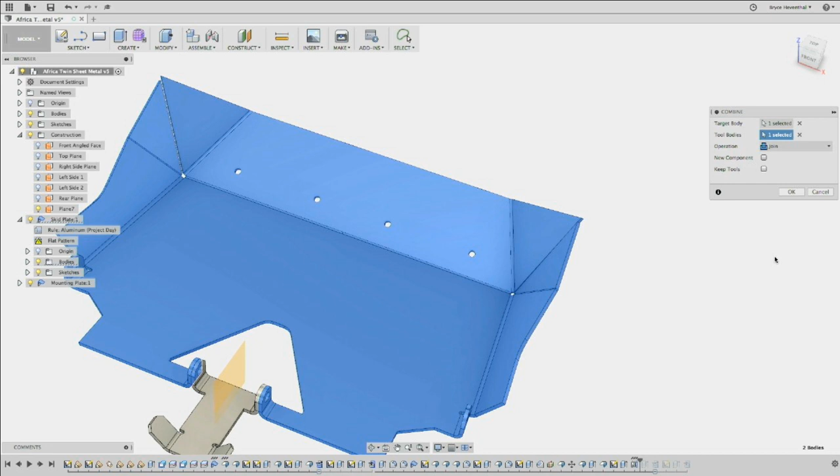And we're going to Patrick. So what I wanted to do next is create this complex vent thing in my sheet metal component. I would have to create this sketch, get into this crazy extrude—it would be hard, but don't worry, Patrick wrote an app for that as well.

What number is he? All right, am I on? Yeah, I am. All right.

So you're going to go super quick because we got almost no time left. I call this one Venter. I see the theme.

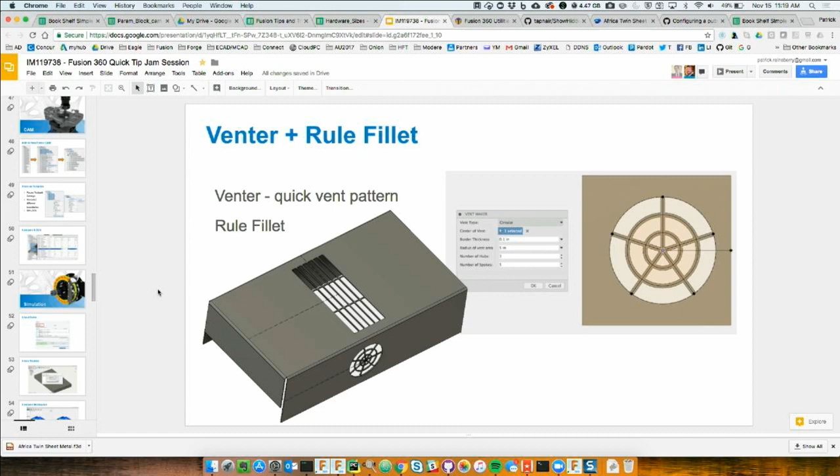This one, usually all these things just happen because somebody says, could you do that? And then like two weeks later, I come back with no sleep, and it's like, I did it. So this one is just for doing vents, so something like this. There's like three different types in here I made.

You could either do just a quick way of generating it—you pick a point in a sketch, and then it takes a little while to compute the circular one. It does that, and you can adjust things like the radius or the number of hubs and the number of spokes. Or you can do slots or rectangles and change little parameters like the number of them, so you can make this like eight or something.

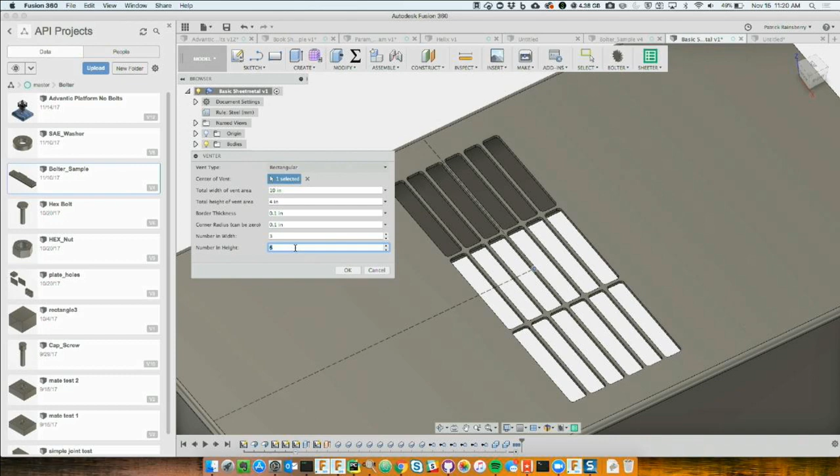And then there's more of them. And then, yeah, no, medium.

All right, while I have this one up, I wanted to show one other thing, because rule fillet is this really powerful tool that sometimes it's hard to figure out when the right time to use it is. This is the perfect example where you have something like this with all these edges and you're like, I want to fillet all of those inside edges but not the outside edges—how do you pick? You don't want to have to sit here and pick every single one.

So this is the perfect example of rule fillet, where my input is either going to be a feature or a face. In this case, this was made by extruding a bunch of things and then combining them all together, so I'm going to pick the feature as the last combine that combined them all together, because that's going to have the reference to all those faces.

Then I'll say whether I want basically outside corners or inside corners—I'll say I only want fillets, and then let's just do something small like 0.1, and it puts the fillet on all the faces that I want fillets on, which is nice, because that would have been a lot of picking otherwise. All right, that's it, I'm done. Awesome.

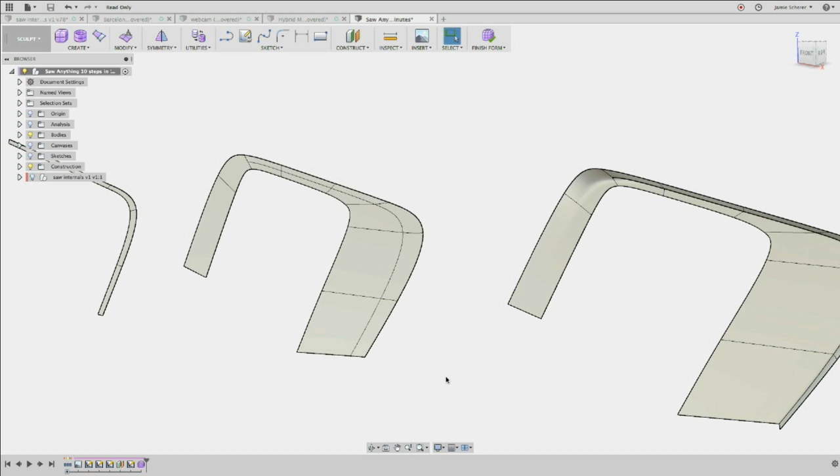All right, let's keep with pace. So I'm going to rip through a few tips and tricks in the Sculpt environment. There's a couple that I want to show. Hopefully, for anyone that's using T-splines and working in the Sculpt workspace, this may be news to you.

Hopefully not. If you grab an edge in the Sculpt workspace, you might be familiar with using Edit Form—when you use it, you can basically drag or move geometry around in space. But in this case, what I want to do is not move that edge, but add another. If you hold Alt while in the Edit Form tool, it'll add another set of faces. So if you just hold Alt, you can continue to add more and more faces.

That's not the tip—hopefully everyone knows that one. The other thing you can do is hold Alt and Command, or Control on a PC, and it will add another face, but it'll do it with a crease.

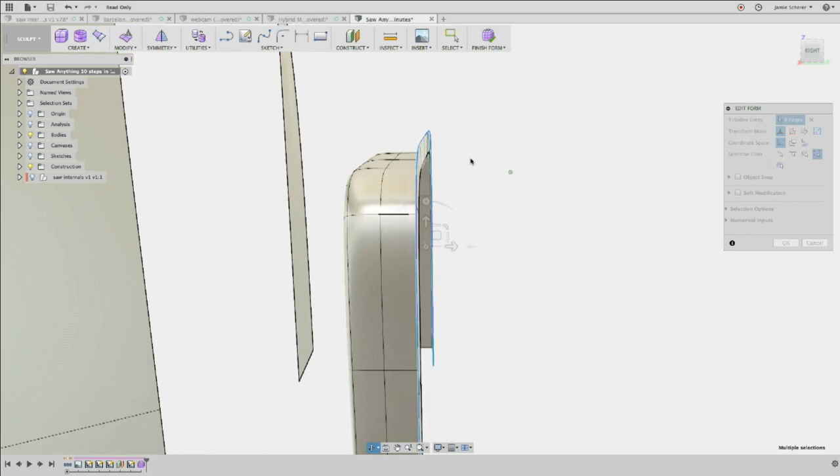Instead of what you saw every time I added a face, I'll do it again really quickly. If I hold Alt and add another face, it'll do it with that transition or blend in the corner. But if I hold Alt and Control, doing the same thing, it creates a sharp edge instead. It'll maintain a crease in there, so you don't have to go back and crease the edge afterward. That's Command on Mac, Control on PC.

Next, I wanted to talk about box mode, as we love to refer to it. Inside Fusion, under the Utilities tab, go to Display Mode, and you'll see three different modes you can model in within the Sculpt workspace: Box Mode, Smooth Mode, which is what you're already seeing, and Control Frame, which shows both at the same time.

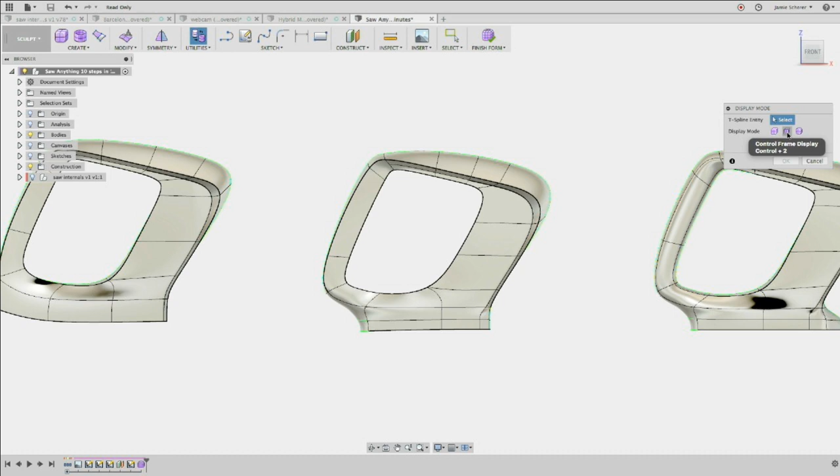If you just grab a component and switch to Box Mode, it'll switch that geometry into its cage representation. You can still model with this and make changes. You can also switch it into Control Frame mode, which shows the smooth geometry underneath along with the cage representation on top of it.

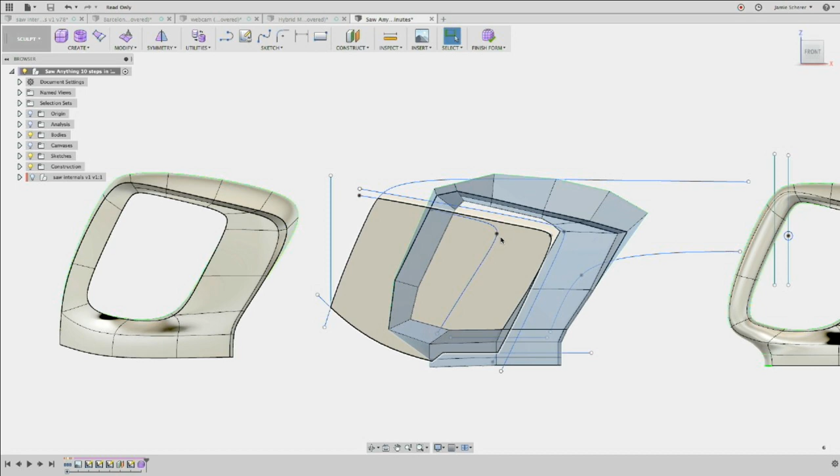The keyboard shortcut for this is Control 1, Control 2, and Control 3 on a Mac, so you can jump back and forth easily. Box mode is great when you're really trying to refine your geometry. Everything in smooth mode looks wonderful, but when you look at the box underneath, you'll quickly find it's not great geometry—you might have draft issues and things like that.

Another thing you can try—people ask all the time, Sculpt is great, I can move things around and make melted ice cream, which is my second ice cream reference in the same session. But in this case, I want to lock those faces to a curve. I want to drive it by maybe a spline curve or something like that.

So again, in the Sculpt workspace, go to Edit Form, and you'll see a tool called Object Snap. Object Snap allows you to snap an entity to a curve or another object. It's a nice way to match a profile—I can grab all these entities, pull them, and snap them to that curve to get a bit more control. Just turn on Object Snaps to do that.

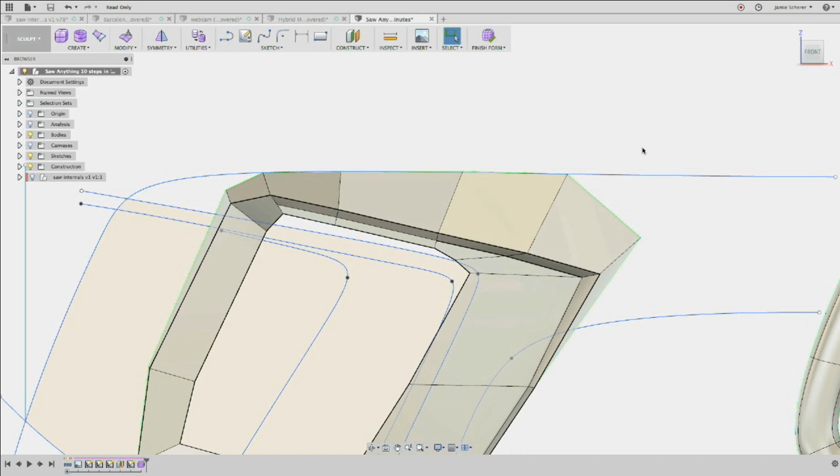Next, let me just check—we talked about Alt drag, smooth mode, box mode. Now Scale to 0. So let's jump back over here.

Another great tool or workflow in the Sculpt workspace: when working with T-splines, you're frequently deleting and manipulating faces, and sometimes they get out of control with very dramatic curves in the geometry. In this example, I want to start making the front end of this saw, the part that goes out towards the blade. I'll grab these faces and hit delete on the keyboard, which removes them and gives me an open edge loop to design with.

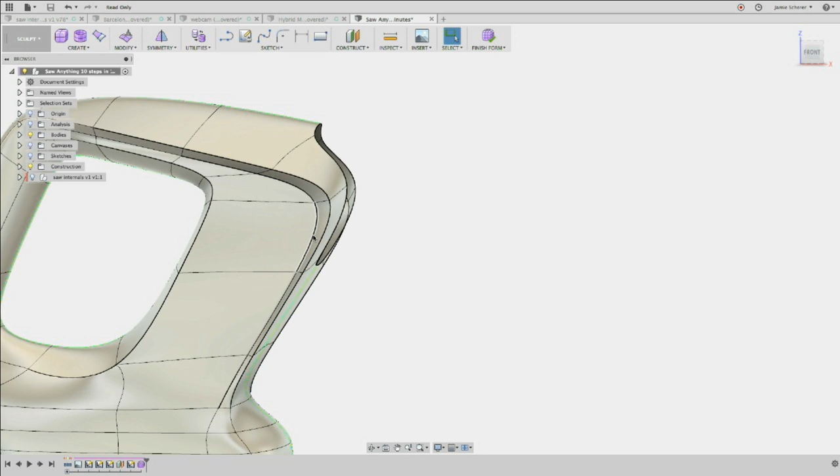But here you can see this has a really dynamic shape, which might show up as bad geometry or a bad surface. So I'll use another technique—grab these faces and scale these edges to 0. Let's see what happens... that did something crazy for a second. Let me try again—I'll pull it out so it's easier to see, and turn off Object Snap, since that was causing it to snap to some weird geometry in space.

You can see this edge right here is kind of all over the place. But if I use the scale tool and scale it larger, it gets more dramatic. If I scale it to a value of 0, it'll flatten it out.

Right, so now I have a nice, more uniform, flat view from that perspective. We call that scale 0—we do it all the time, and it's a really good one.

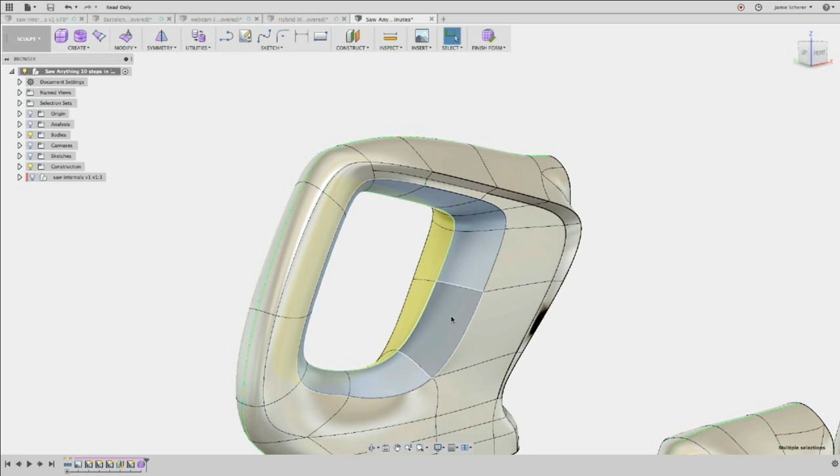One other quick one: shift select. In the sculpt workspace, if you single click on a face, you'll grab the face. Double click on a face, you grab the whole body. But if you want to grab a whole handle, click a face, hold shift, double click the next face, and it'll grab the whole loop—it'll continue grabbing those faces until it terminates. So if I wanted to grab the inside here, click, shift, double click, it grabs the whole loop. Just a quick one that's super helpful.

All right, I know we're running out of time. We talked about object snap—let's talk about updating surface geometry with spline handles.

All credit goes to Chad Lockhart on this one—this is a really cool technique he just showed me recently that I love. So if you're used to overbuilding parametric surfaces and driving them with curves, and you just want to explore a shape, I can grab my spline, move it, and it'll update. I can move it along that plane, but what I don't have access to is the control handle to manipulate the curve—you don't have that access when you're not in the sketch.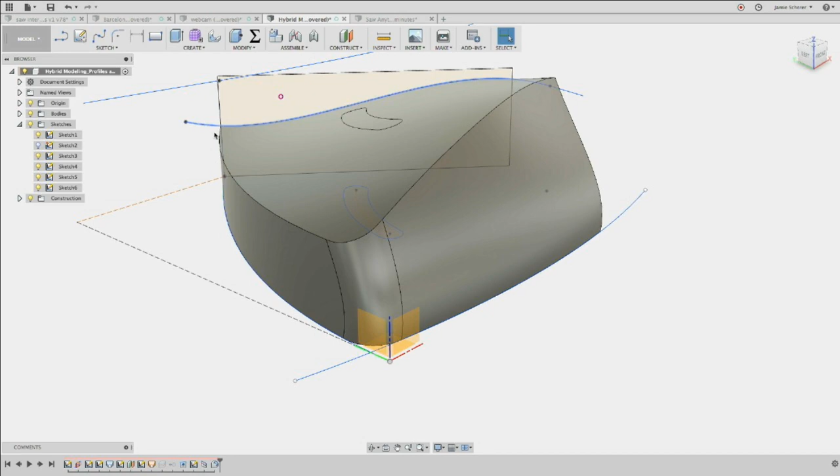So here's a fun little workaround. If we go in and edit that sketch quickly, all I'm going to do is build a control handle that I can drive this with. I'll do it really quickly with this curve right here in the interest of time. So if I grab this, edit the curve, all I'm going to do is build a control handle.

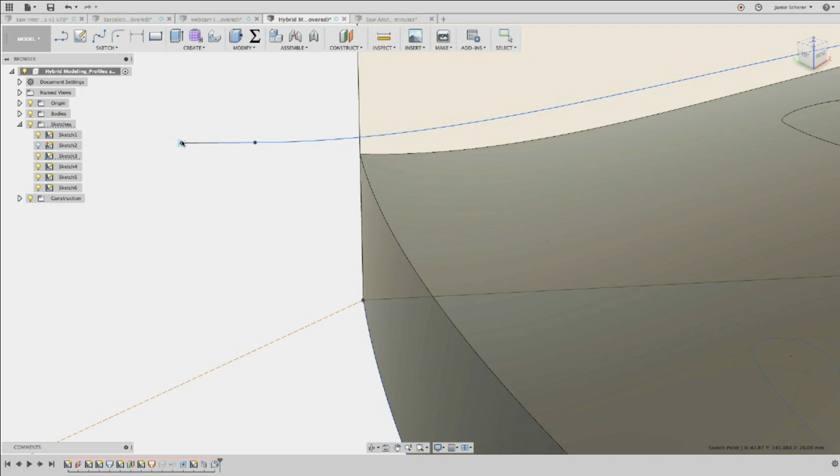As Bryce mentioned before, you can see when I started to build that, it was picking up constraints out in space—so this is another good use case for holding command so you don't lock any constraints you weren't looking for. All you have to do is take this line and constrain it to the curve: a coincident constraint between the endpoints, and a collinear constraint between the line and the control handle. Now when I leave this workspace, I have an extra line here, which is essentially my control handle. Super cool—so kudos to Chad on that one. It's a nice way to be able to drive that now out of the sketch.

All right, I know we're probably—yeah, we're running low on time. We're going to rip through a couple of these lightning round things. You guys can leave if you want—it's lunch—but if you want to continue, we have ones in render, simulation, cam. Good, no one's leaving—the door's locked anyway. You actually can't leave. So I'll go through a couple of these really quickly.

Saving a rendering: if you don't do this now, in the render workspace you can grab any rendering that you create, drag it over into the rendering gallery, and it says render on save. This way, every time you save a new version, it'll update that rendering for you. So if you're making changes to files and don't want to spend 20 minutes, 10 minutes, an hour—whatever it takes—to update the rendering, it'll update automatically.

Replace materials—this is a pretty fun one. All you have to do in the dialog box is drag a new material, drop it on top of another one, and it'll replace it anywhere it appears in the model. This is great when you import SolidWorks or anything, because it comes in with 50 different grays—50 shades of gray. You can replace them all pretty quickly just by dragging them on top of each other.

This was new in a release—I don't know how much everyone needs to know this, but it's super cool. In the spring, we added dielectric priority control. What that does is allow you to control the priority of dielectric materials, or anything that doesn't conduct electricity—basically everything that's not a metal object. In these two examples, you can see the difference between the priority settings.

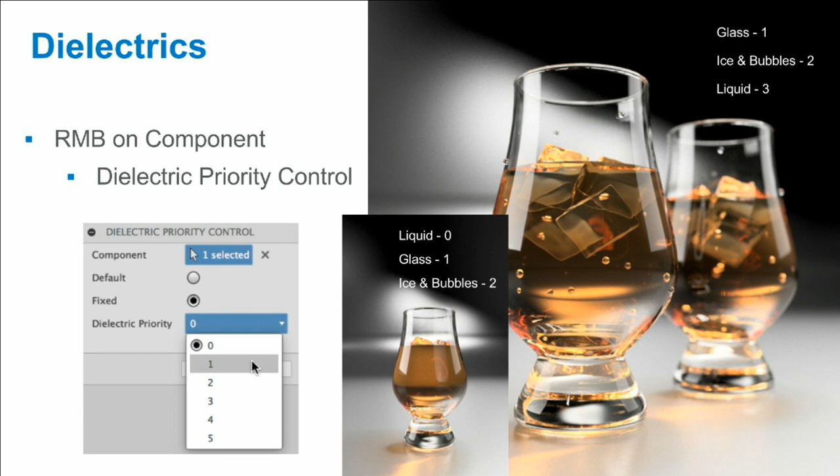In the glass down here, it's actually prioritizing rendering the liquid over the ice cubes. And in the nice rendering in the back, it's the opposite, right? It's rendering the glass first, it's rendering the ice and the bubbles, and then the liquid. And that's why you see the ice better, right? So it's just a nice way to be able to control those in the render workspace.

Another one that I'll just talk about really quickly, because I don't think this is apparent to everybody, you'll find in the appearance dialog, there's My Appearances and Favorites. So Favorites would be a great example if I'm working on, I don't know, a material and I want to be able to recall it later. I've tweaked the color, right? I made it my brand color or something like that. If you right-click on a material, you can add it to favorites.

If you right-click on a material, you can also copy it to My Appearances, and that's cloud-based. So if I was to log in on Bryce's machine, I would see all of my appearances, not my favorites, right? So just keep in mind there's a difference between the two, and that's where you'd want to use it if you want to be able to access them later.

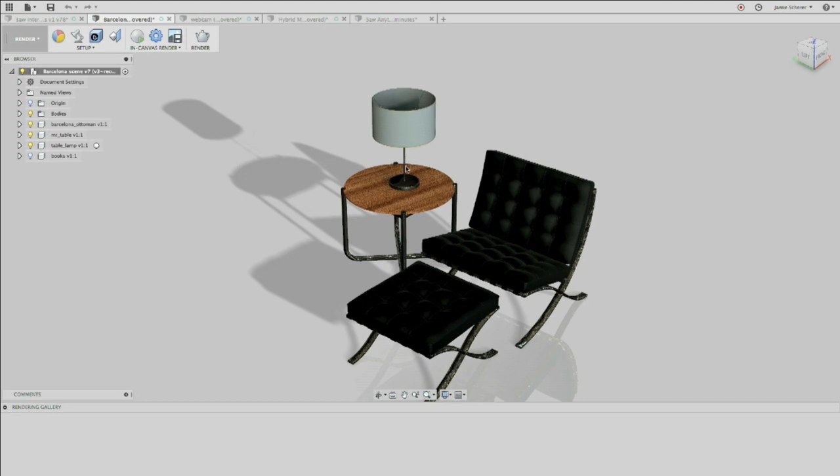Another one, I want to show this one really quickly because it shows well. Just talk quickly about lights and emissive materials. So inside of Fusion, hopefully you're familiar, we have material types that are light emitting, right? So there's not lights in the render workspace. You just have to make any object a light emitting material. So case in point, I have my Barcelona chair in this scene, and what I want to do, jump into the appearance dialog box, and I'm going to make the light bulb a light emitting material, right?

So now when I render this out, and of course we're not going to wait for it to finish, but we'll just do a quick in-canvas render. You should see that the light coming from that light bulb is casting a shadow down on the ground. It's starting to light up the table and things like that. But it's also competing with the light of the environment, right? So that's why it's maybe washed out. You don't see it all that well.

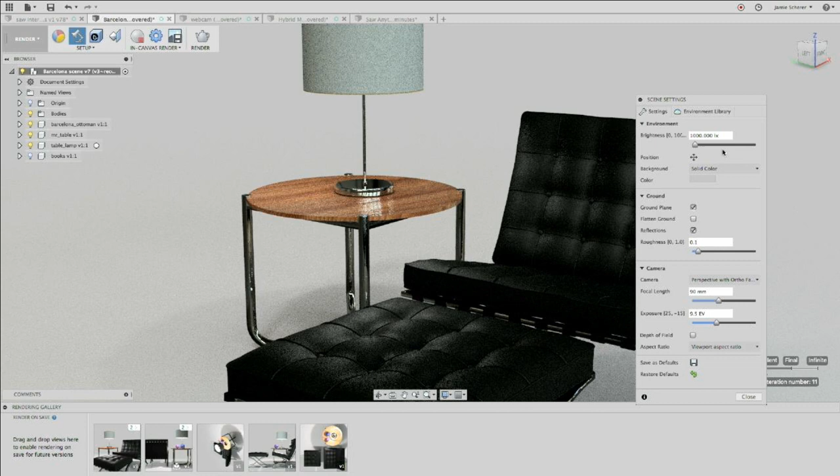So a little tip and trick, if you jump into the scene settings dialog, in the environment tab, there is a value for the luminosity of the HDR environment. So case in point, if I took that from a value of 1,000 to 500, you'll see it's darker. And also, I'm going to switch this from solid color to the environment itself, right? So now my beautiful chair is sitting in a warehouse or something like that, but that's okay.

If I were to take this down to a value of 0, now that light bulb is the only light emitting source in the scene, right? So that's how you get the difference between that light bulb is on, clearly you can see it, but it's not the only light source in the scene, right? So just control the environment for something like that.

Another really quick one, none of these are as quick as I promised they are, but it's just my way of stopping you from leaving.

So there's two really cool ones that I like. So hopefully you're familiar. If you haven't been doing it already, inside of Fusion 360, you can create a motion study. A motion study is a combination of joints, essentially. So I created some motion studies to make my little webcam rotate, and then it kind of turns back and oscillates and moves up and down, right? I'm not going to talk too much about motion studies because I like rendering better. You can take those motion studies and render them out.

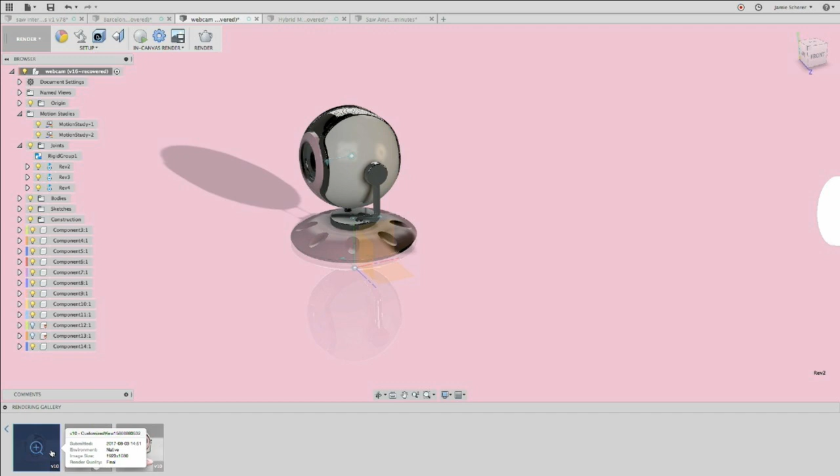So if you're not doing it today, all you have to do is go into any rendering that you already created. So you have to create a rendering first, and then you can open it up and then re-render it as a motion study. You'll see it's the little box with the arrows underneath it, and then that will create a motion study. So the end result would look something like this, right? Where it's going to go through its range of motion using those joints that I created before.

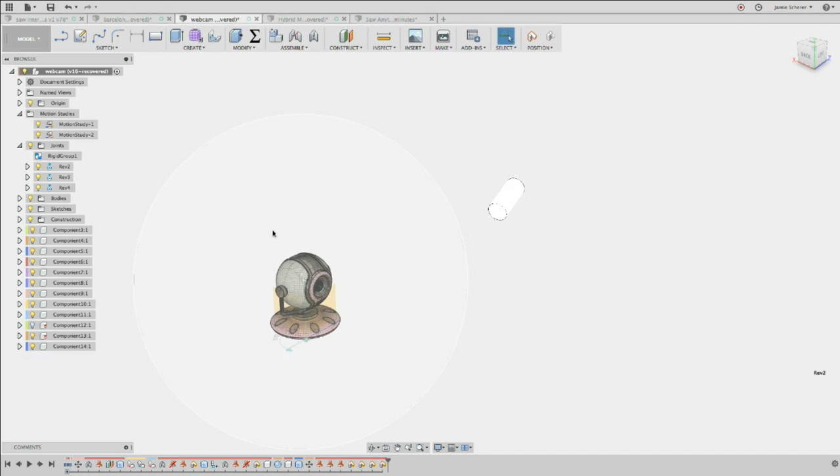Another one that I love, this is a nice way to, again, use the different workspaces as they work nicely together, is rigging up a light system, essentially. So you'll see I have a light emitting object. It's just this cylinder out here in space. And I'm going to jump in, and I've created a ball, right, or a sphere, I should say. This sphere, I applied air as a material, so it's completely transparent and won't show up in my renderings.

And all I'm going to do is create a joint between the light that I created, my cylinder, and my ball. And then I'll just pull it out here in space so it's at some distance that I want. And essentially, this is now rigged. Oops, let me try that again.

Oh, Bryce, I broke it. Oh, that's why. I just created a rigid joint, which is a revolute joint, which isn't going to do me any good. I'm going to make it a ball joint, and now that is like a light, right? I can move it around. And this works even nicer.

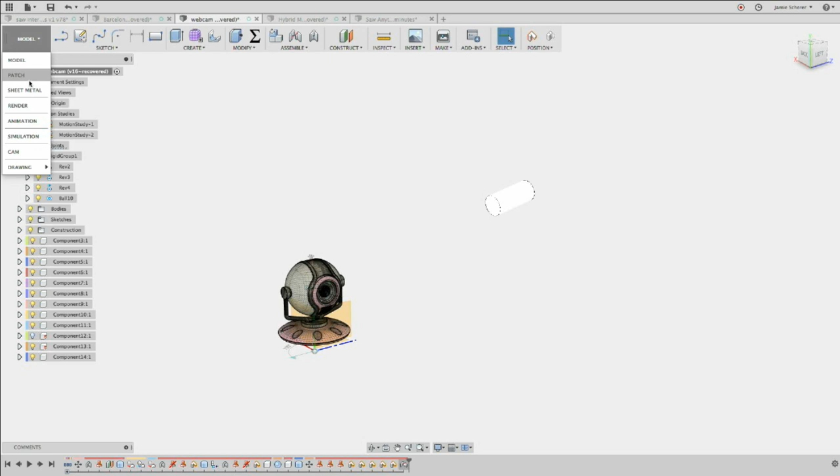It's a little slower, obviously, in the render workspace. Yeah, this is a great idea. This is also Chad. I'll give full props to Chad Lockhart on this one. But it's cool, right? I can move this around, hit render, move it around, hit render, and jump back and forth between those pretty quickly.

So I'll turn it back to you, Bryce, if you want to talk a little bit about CAM. Yeah, I only got a couple more. Feel free to walk out as you go. Yeah, switch it. Yeah. No, I'm good.

Okay, sorry. Yeah, so last but not least, we're gonna jump into some CAM. We have tons of other ones as well. This one's gonna be fairly quick. First one is probably my favorite while in the CAM environment: you could select a bunch of toolpaths, right click and use the compare and edit toolbox. And it actually lists all the ones I had selected, all the parameters.

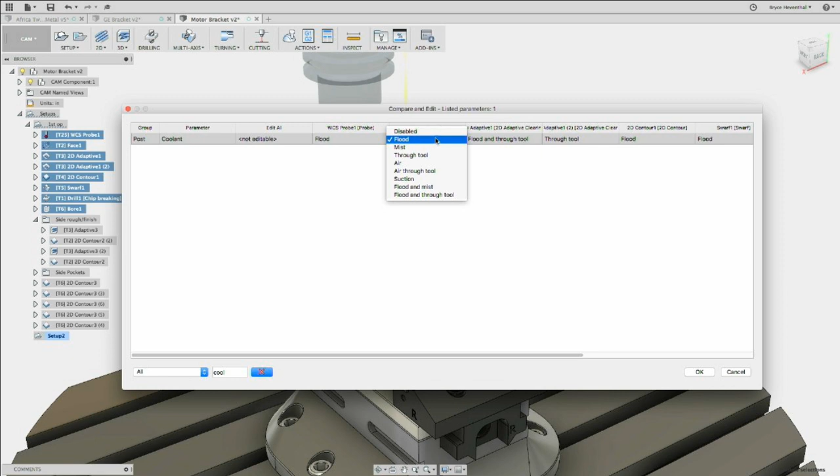And let's say I wanted to turn the coolant off, for instance. I could just type in coolant. I have a ton of different options. And just select them all, and I could change them all here in this Excel-like interface. It only does it for the ones you have selected, so watch out. It is a little bit daunting when you're not filtering, because there's a lot of parameters in here, so make sure you just search on the right parameter. That's good. No, I don't want to update that.

Next, we do a lot of parts that we set up with the same exact toolpaths. So what I would highly recommend is coming in here and creating templates. So you could select a group of toolpaths once you figure out your basic parameters, and you could just right click, say create from template. I have a few that we just have for basic 3D strategies, 2D strategies, one with a ton of strategies. Well, in this case, we'll just say we want to grab 3D.

A lot of the 3D toolpaths actually don't need a lot of selection, so it'll churn right through them. Some of the 2D toolpaths, you'll still have to go in and edit and select maybe heights, where the contour geometry is, but it gets you halfway there. The 80-20 rule, it gets you a lot of the way there.

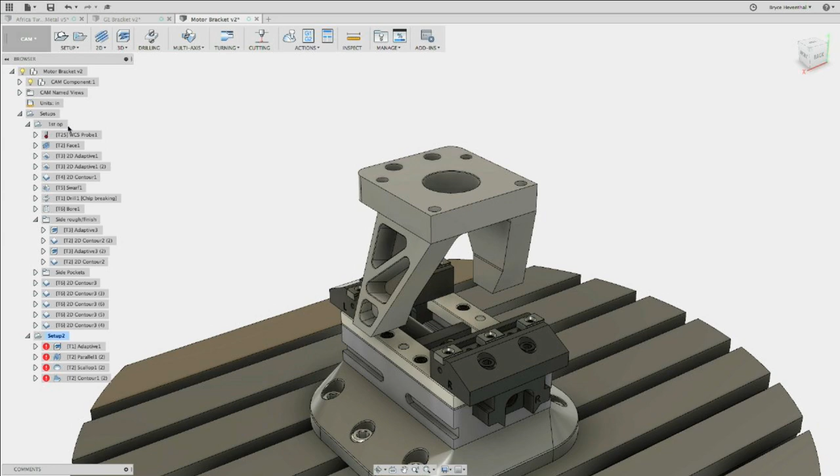Final one I have for you guys, let me come up here and simulate this one, because we're way over on time: there's a lot of things you could do in the simulation tool set. Let me change this a little bit so it's not as daunting. So what you can do is a couple different things. You could play on the timeline, and it'll go to that point in the simulation.

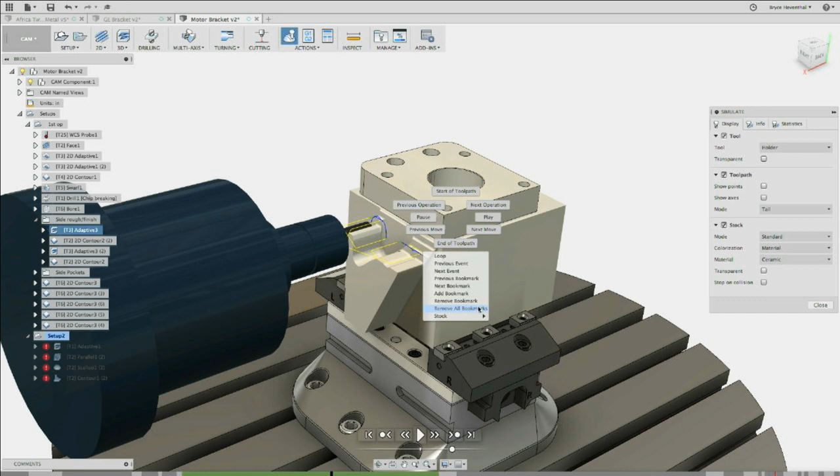But the main thing I really love doing is you can actually right-click here, go to the stock option, and you can actually load stock. You could save this stock out, and you could use this for different operations if you needed to. That's the last one that's very hidden, in my opinion, that it's kind of hard to find.